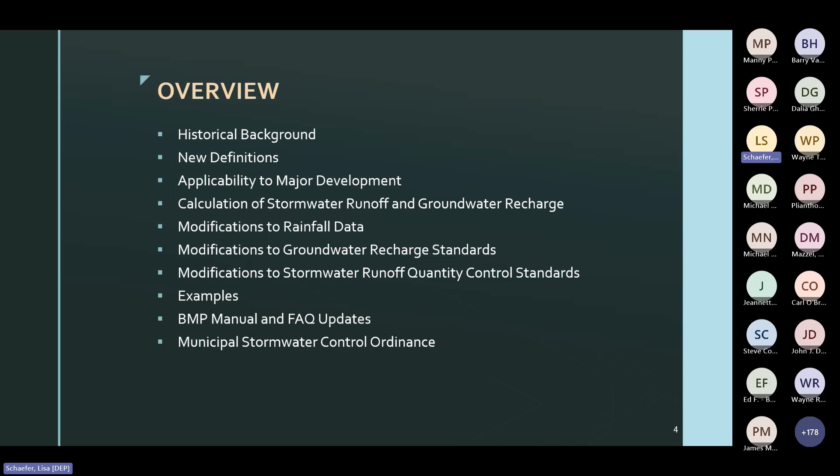So I hope you find the examples to be helpful. I'm also going to briefly review the other updates that were made to the BMP manual, plus those to the FAQs and the Municipal Stormwater Control Ordinance, or SCO, as I will abbreviate it going forward. All right, so lastly, before we wrap up, there will be a Q&A session.

Okay, so it's time for that brief history lesson on what led to the rule amendments and an overview of the studies involved. Executive Order 100 was signed by Governor Murphy on January 27th in the year 2020. This required that the DEP shall, within 2 years of the date of this order and consistent with applicable law, adopt Protecting Against Climate Threats, or PACT, regulations.

Furthermore, it required the DEP integrate climate change considerations, such as sea level rise, into its regulatory and permitting programs, including, but not limited to, land use permitting, water supply, stormwater and wastewater permitting and planning, air quality, and solid waste and site remediation permitting. Subsequently, Administrative Order 2020-01 was signed by then Commissioner McCabe to integrate climate change considerations and so forth into the DEP's regulatory and permitting programs.

In accordance with the executive order, the department conducted research and underwent several stakeholder meetings beginning in 2019, first as part of the PACT rules, and then again independently in October of 2022. The department released a New Jersey scientific report on climate change in 2020 and reports on rainfall studies in 2021. All of these were in preparation to address the impacts of climate change, which then led to the proposal on December 5th, 2022, and adoption on July 17th of this year of the Inland Flood Protection Rule.

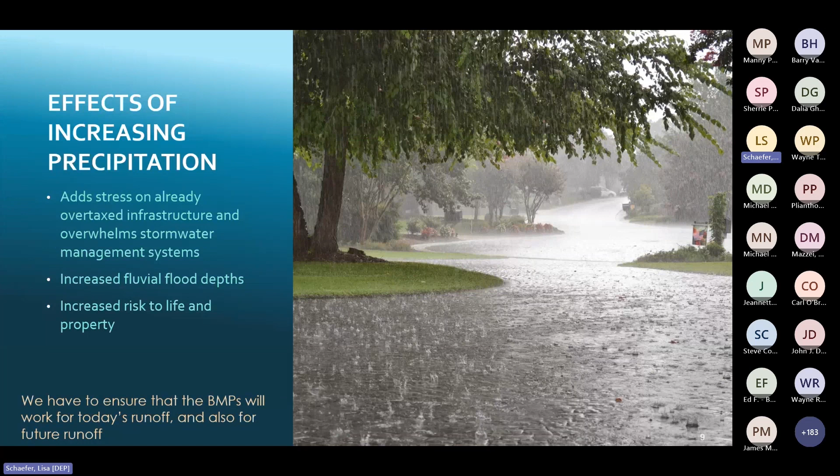So the adopted rule amendments are what is required to address these impacts. This information was shown just a few slides ago, and we're just going to move on to the changes made to the stormwater management rules.

So the rules are found at NJAC 7:8, and they were amended to address the role of climate change in BMP design. First, I'm going to provide a guide as to which subsections were amended. Let's start with Chapter 1 of the rules. I've underlined the subsections where the rules were amended, namely subsections 1.2 and 1.6. The details of those changes will be discussed momentarily.

Listed on this slide is the layout for subchapter 5 in the rules. Within this subchapter, the rule adoption amended only the underlined subsections, namely 5.4, 5.6, and 5.7. I will discuss those after I go over the changes made in subchapter 1.

So to provide some visual structure to the slides, all of the slides that follow for the stormwater management rules are going to have a dark teal green background. They're going to have a deep red box or tab on the upper right. I've further divided these so that the slides for subchapter 1 will have a light bluish green stripe on the left, while those specifically for the calculation sections of the rules will have a deep red stripe.

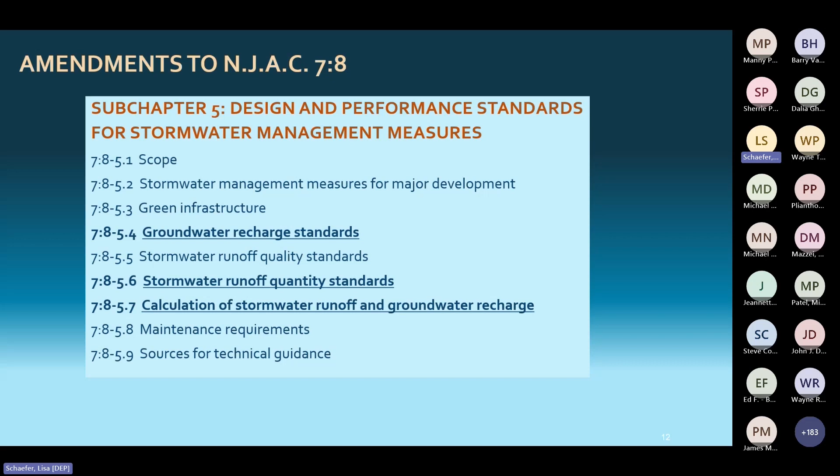Okay, so the amendment adds 2 definitions regarding public transportation projects that are subject to the rules in effect prior to this rule adoption, depending on when the public transportation projects achieve a certain status.

A public roadway or railroad means a pathway for use by motor vehicles or trains that is intended for public use and is constructed by or on behalf of a public transportation entity. A public roadway or railroad does not include a roadway or railroad constructed as part of a private development, regardless of whether the roadway or railroad is ultimately to be dedicated to and or maintained by a governmental entity.

And a public transportation entity means a federal, state, county, or municipal government, an independent state authority, or a statutorily authorized public-private partnership program pursuant to public laws of 2018 at the citation listed here that performs a public roadway or railroad project that includes new construction, expansion, reconstruction, or improvement of a public roadway or railroad.

Now note that a public transportation entity includes municipalities and counties that perform public roadway or railroad projects, but does not include the roadway within a private development, but dedicated to the municipalities or counties or to be maintained by the municipalities or counties.

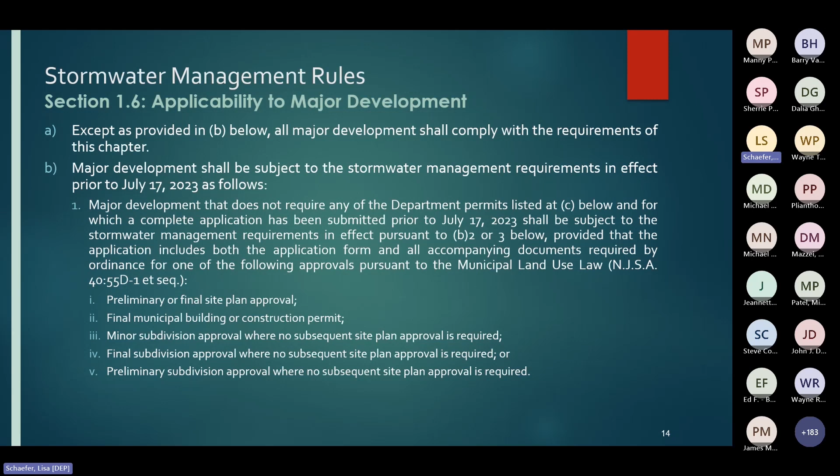Item 2 establishes the time frame for projects subject to the rules in effect on March 1st of 2021, again, providing it included all the required materials I just discussed. Similarly, the same goes for item 3, except the rules are those in effect on March 2nd of 2021, and projects are also subject to the same conditions regarding items submitted.

So now for item 4, which is for projects submitted to the department. If a major development project needs a flood hazard area, a freshwater wetlands, a coastal area facility review act, a waterfront development, or a highlands permit, and those permit approvals need a stormwater management review component, is technically complete and...

...has been submitted prior to July 17th, it is subject to either the rules in effect on March 1st of 2021 or the rules in effect from March 2nd, 2021 through July 16th, 2023, depending on when it was submitted, and provided everything required by the department's rules for those permits plus the application form are submitted prior to July 17th of 2023.

And take note that technically complete means that each item included in an application provides sufficient information for the department to declare the application complete for review, public comment, or public hearing.

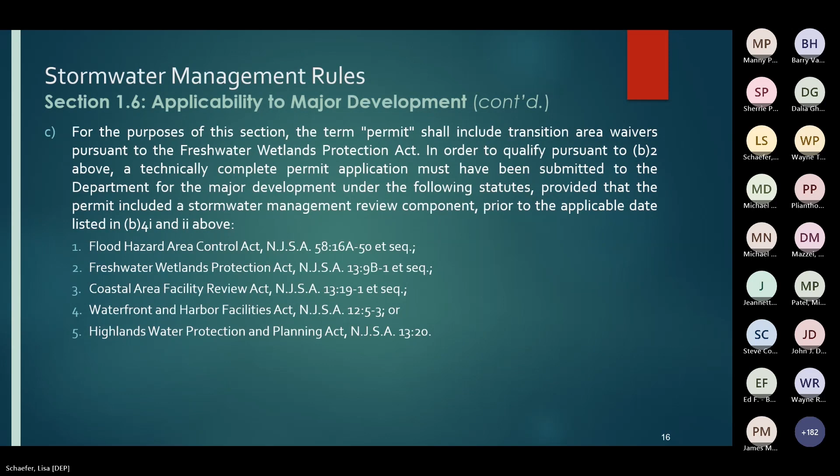Moving on, exemptions expire with the expiration, termination, or other loss of duration or effect of either one of the qualifying local approvals or department permits, whichever comes first.

The expiration of local approvals under B1 above shall be governed by local ordinance. And in the event there are multiple qualifying department permits under item C, the expiration date is governed by that permit, which expires last, provided that the permit is still in effect.

So once the exemption expires, the major development shall be subject to all requirements of this chapter upon reapplication for that permit and all subsequent permits or local approvals under the municipal land use law. And there's also one more citation for limits on those exemptions.

And this next bit is really important. The aforementioned exemption is limited to the land area and the scope of the project addressed by the qualifying applications or subsequent approvals. The review agency will consider the impacts from any revision, including but not limited to the items listed here, and may deem the exemption void if the revisions do not have a de minimis impact.

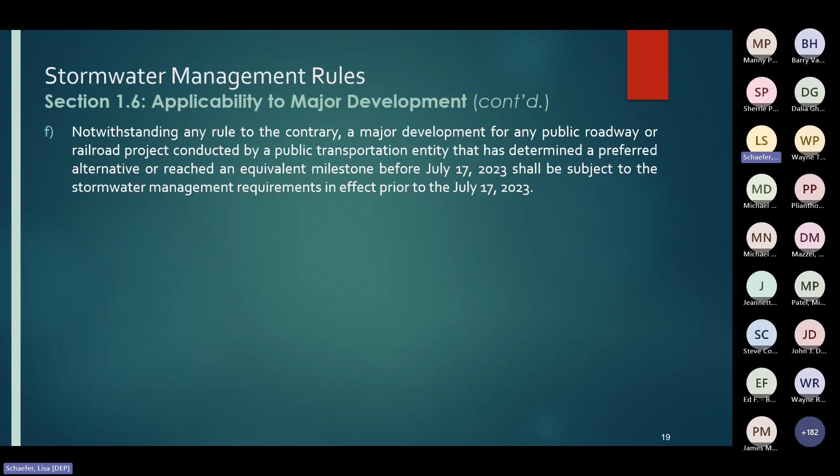Public transportation entities must demonstrate that the project has determined a preferred alternative or has reached an equivalent milestone prior to the rule adoption. The logic is that these projects have already undergone a significant level of planning and design such that revising the project now to meet the new rules would be a waste of public funds.

Next are 4 examples to help clarify the applicability portion of the rule adoption. To start things off, I have 2 examples for projects where a department permit is required.

For example 1, a non-residential major development submits an application for the department's Flood Hazard Area Control Act permit with a stormwater review component on August 1st of 2023 and is deemed technically complete. The non-residential major development also submits an application to the township for preliminary site plan approval on August 1st of 2023, but the township's SCO is still in alignment with the rules in effect prior to July 17th, that is, the prior rules.

So what rules or ordinance are applicable to this non-residential development? The answer is that the department will review the stormwater component of the application under the stormwater management rules adopted on July 17th, okay, the adopted rules. Therefore, the non-residential major development shall have in its design stormwater management measures in accordance with the adopted rules.

However, the township will review the stormwater management under its SCO pursuant to the prior rules. Now, since the design complying with the adopted rules is supposed to be more comprehensive and has a higher capacity than the design under the prior rules, the design under the adopted rules should be able to pass the stormwater control ordinance in effect pursuant to the prior rules.

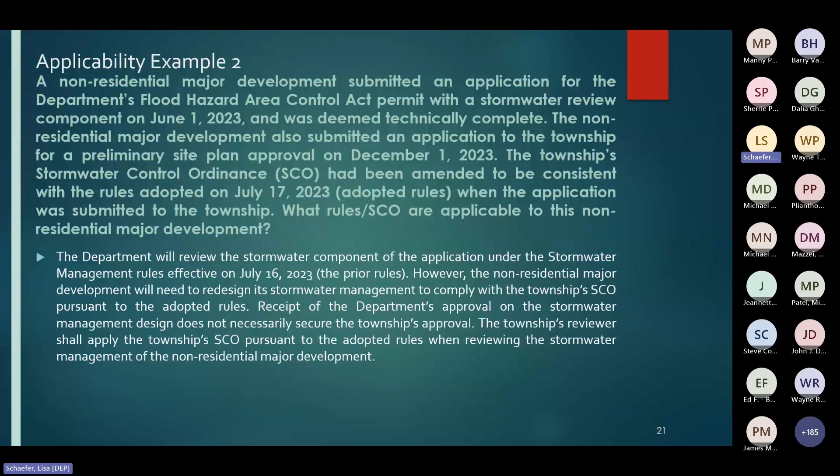Receipt of the department's approvals on the stormwater management design does not necessarily secure the township's approval. The township's reviewer shall apply the township's SCO pursuant to the adopted rules when reviewing the stormwater management of the non-residential major development.

Now I have 2 examples in which a permit from the department is not required. In this case, we have a non-residential major development submitting an application to the township for preliminary site plan approval on December 1st of this year, but the SCO is still in alignment with the rules in effect prior to July 17th. So they're operating under the prior rules. The project will not require a department permit as described in the list published in the rules at subsection 1.6c.

So the question is, is the project subject to the amended stormwater management rules? The township will review the stormwater management under its SCO pursuant to the prior rules, provided the submittal includes all of the required documents prior to the township amending its SCO pursuant to the July 17th, 2023 amendments to the stormwater management rules. Pursuant to the requirements of the MS4 permit, the township must review its SCO to align with the amended rules and have it be in effect within 1 year of the rule adoption.

For our last example, another non-residential major development submitted an application to the township for preliminary site plan approval on December 1st. By this time, the SCO had been amended to be consistent with the rules adopted on July 17th, when the application was submitted. Again, no permit is required from the department. So is the project subject to the amended stormwater management rules?

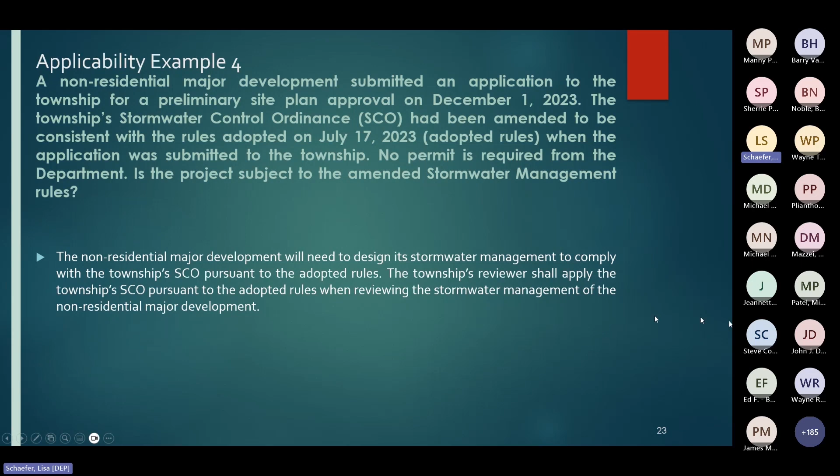Moving forward, the slides with this red stripe on the left all pertain to Subchapter 5 in the Stormwater Management Rules. There are no changes to subsections 5.1 Scope, 5.2 Stormwater Measures for Major Development, 5.3 Green Infrastructure Standards, 5.5 Water Quality, 5.8 Maintenance, or 5.9 Technical Sources.

I'm going to handle the remainder of the subchapters out of order, starting with 5.7, Computational Methods, as this impacts the remaining subsections I'm going to cover.

There is a change in the allowable computation methods, namely only the NRCS methodology is found in the adopted rules. So take note that the NRCS methodology must be used when calculating the water quality design storm.

Throughout the remainder of this presentation, I'm going to do my best to give you the page citations from the BMP manual. This information is included under item 13 on page 32 of Chapter 5 in the BMP manual.

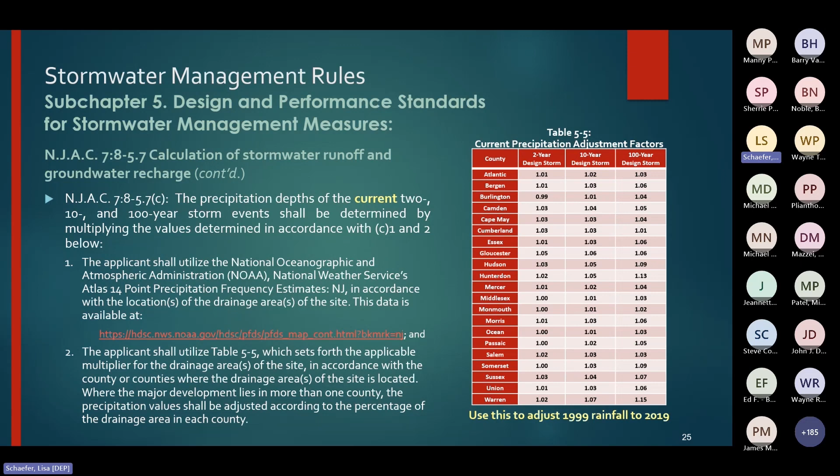As an alternative, you can use the county 24-hour rainfall data from the NRCS and apply the current precipitation adjustment factors from Table 5-5 in the rules for your county. The county-specific 24-hour rainfall data published by the NRCS in the 2012 Engineering Field Handbook is reprinted as Table 5-1 on page 15 of Chapter 5 of the BMP manual.

Now, there's a second multiplier required in the rule amendments. Applying the future precipitation change factors to the published NOAA rainfall data will allow us to look ahead to the period from the year 2050 through 2099 to address the future impacts of climate change.

So of course, for a site in more than one county, it's the same method from the bottom of the previous slide, but you're going to use the future projected change factors. That means you multiply the rainfall depth from the first area by the county-specific future precipitation change factor for the design storm that's specified, and then multiply that product by the percentage of the total area lying in the first county. You do this then for the second area using the future precipitation change factor for the second county for the same year design storm, and you sum them up to get the future projected total rainfall depth for that design storm.

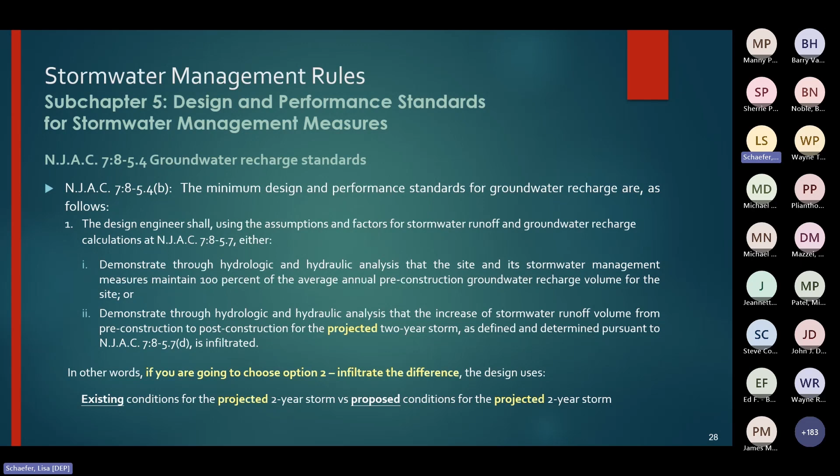Similarly, there's rule text for the second option to demonstrate compliance with the stormwater runoff quantity standards. As on the previous slide, the bold or yellow text is the portion of the rule that's been amended in the rule adoption.

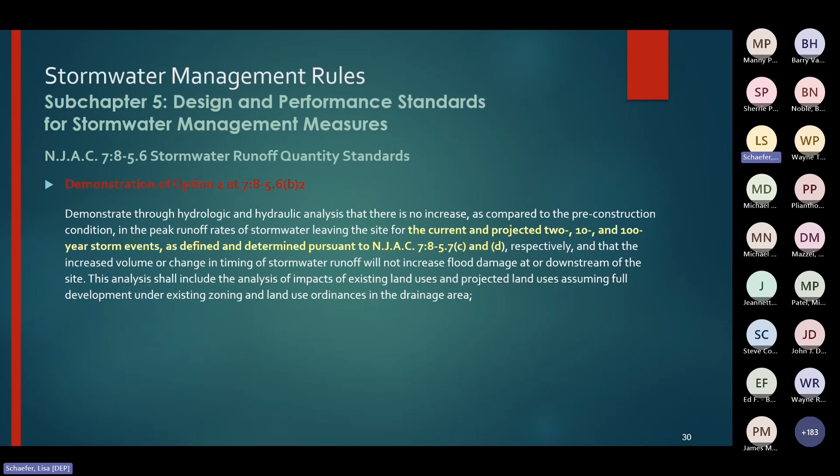So regardless of which option is selected, the quantity control calculations required will have to include an analysis of the runoff volumes produced for both the current and projected design storms. You're going to review the pre-construction, aka existing conditions, and what's proposed using the rainfall data to which the current precipitation adjustment factors are applied, to do your comparison using the numbers that reflect what is precipitating in 2019.

You also have to review the pre-construction or existing conditions and what is proposed using the rainfall data to which the future precipitation change factors are applied, to do your comparison using numbers that reflect what will be happening from 2050 to 2099. That way, your review checks the design's work for what's currently precipitating and what we can expect will precipitate due to climate change.

If you recall, I covered the time of concentration calculations on slide 27, but they also come into play here. And I will say that if you are using modeling software to design or review the accuracy of designs, I think you'll find it easier to create a separate model for projected storms, separate from that for the current storms, because of the different rainfall depths.

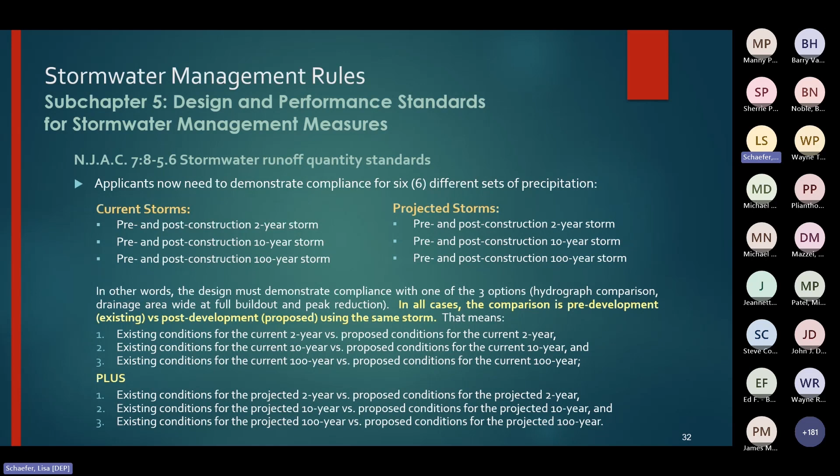You may also want to look at page 84, chapter 5 of the BMP manual, which has an updated summary of modeling guidance. I do have 5 examples for you today, but I see I'm running a little late, so bear with me.

The first is applying the current precipitation adjustment factors to a site located in just one county. The second example will be for a site partly in one county and partly in another. The third is a comparison of hydrographs from the pre and post development conditions for the projected and current storms when the impervious cover is reduced by the proposed design.

The fourth example will show how a design using a small-scale BMP will meet the groundwater recharge requirement. And the fifth example is sizing an MTD using the NRCS methodology.

So for the first example, we're going to apply the current precipitation adjustment factors to the rainfall data for a site located at Trenton Station 2 on the NOAA NWS PFDS website.

So we go to the website found at the URL, and in the data description section from the drop-down menu, you're going to make sure that it says precipitation depth rather than precipitation intensity, as shown on the left. Similarly, for the time series, you're going to ensure that partial duration has been selected from that drop-down menu.

And in step B, under the select location option, you're going to either manually enter the location using one of the options shown on the screen, or use the map to locate the site and then zoom in. Of course, here we're looking for Trenton Station 2.

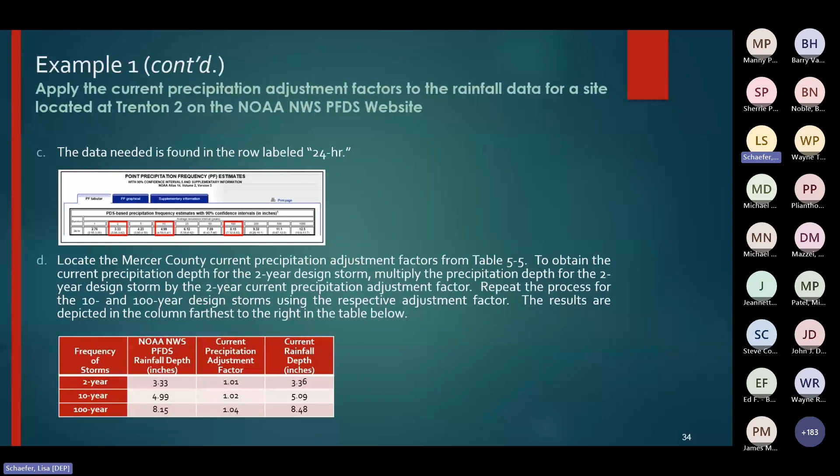For the next example, we've got a site situated in 2 counties, and the method is to obtain the current adjusted rainfall depths for each of the 2 counties and then weight average them based on the area of the site in the respective county.

The site is located on a county line shared by Middlesex and Mercer counties. One-third of the site is in Middlesex, and the remaining two-thirds is in Mercer County.

In step A, we obtain the NOAA data and the current precipitation adjustment factors and calculate the rainfall depths for each of the design storms for each of the counties.

Example 3 provides a scenario showing non-compliance with the requirements when the proposed development reduces the regulated motor vehicle impervious surface and increases the slope of this surface.

Often for redevelopment projects, a designer may choose the option at 7:8-5.4(a)3.i to demonstrate compliance for quantity control — that for stormwater leaving the site, post-construction runoff hydrographs for the current and projected 2, 10, and 100-year storm events, as defined and determined pursuant to 5.7C and D respectively, do not exceed at any point in time the pre-construction runoff hydrographs for the same storm events.

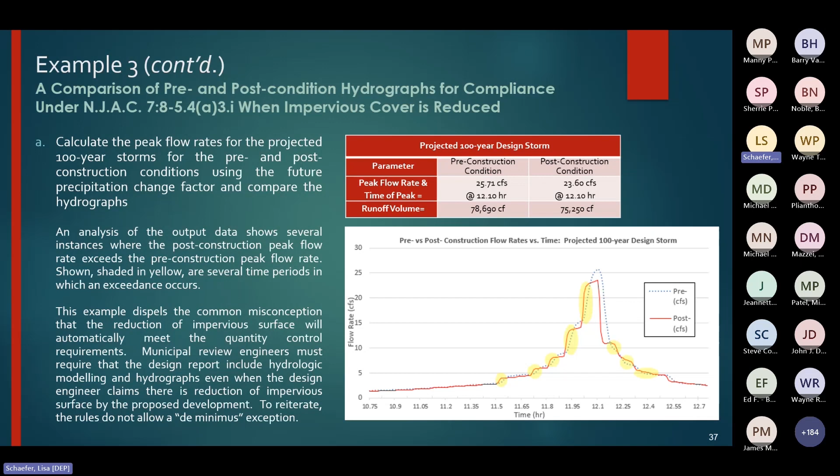Example 4. This example provides a scenario showing the groundwater recharge calculations.

A 2.5-acre wooded lot is located in Somerset County. The lat and long of the site are 40.4573 and negative 74.5309 degrees respectively. The proposed development consists of a 1-acre office building, a half-acre parking lot, and a half-acre lawn area, plus half an acre of existing woods that will remain undisturbed. We're going to design a stormwater management system to meet the rules, and the soils present on site are HSG B.

We'll assume a small-scale infiltration basin is to be designed to meet the design and performance standards for demonstration of groundwater recharge requirements by infiltrating the increase in stormwater runoff from the pre- to post-construction condition for the projected 2-year storm. And we're going to calculate the volume of runoff to be recharged.

I'm going to skip parts of the design calculation because I want to focus on the groundwater recharge requirement. For this site, I've included the NOAA rainfall depth, the future precipitation change factor for Somerset County, and the depth of precipitation for the projected 2-year design storm.

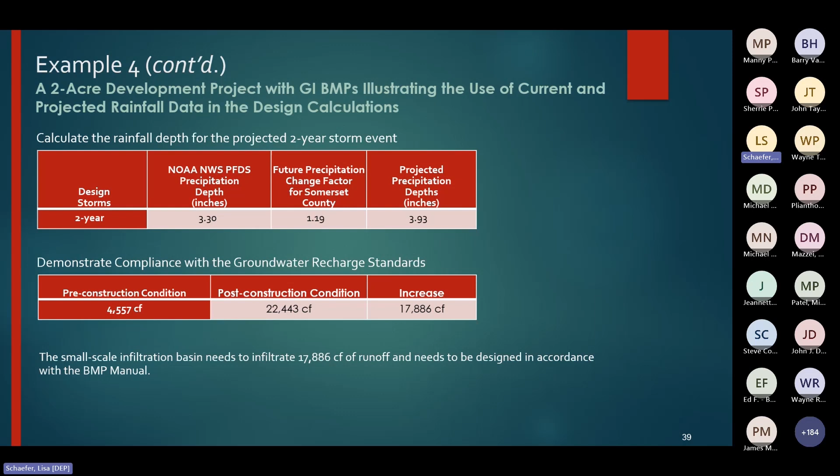Okay, we're going to move on to example 5, sizing an MTD using the NRCS methodology. If you recall, the rule amendments discontinue the use of the rational method and modified rational method for stormwater calculations, so now we will walk you through what is required.

We're going to calculate the peak flow rate for sizing an MTD, treating the water quality design storm from a quarter-acre impervious motor vehicle surface.

So we have these parameters, and when using the NRCS methodology, you need to calculate the time of concentration, for which we follow the method covered in example 5-1 of chapter 5 in the BMP manual. That example begins on page 33 of the manual, and it's also the formula found on slide 27.

As stated earlier, we use P2 for the projected 2-year storm in the T sub C calculation for the water quality design storm, but there won't be that much difference here if we mistakenly use that for the current 2-year design storm, given that our drainage area is only a quarter acre.

Then we calculate the maximum sheet flow length using the formula for the McCuen-Spiess limitation, found on page 24 of chapter 5 in the BMP manual, and we calculate that to be 909 feet. However, the maximum sheet flow length should not exceed the McCuen-Spiess limitation or 100 feet, whichever is shorter, so we're going to use 100 feet.

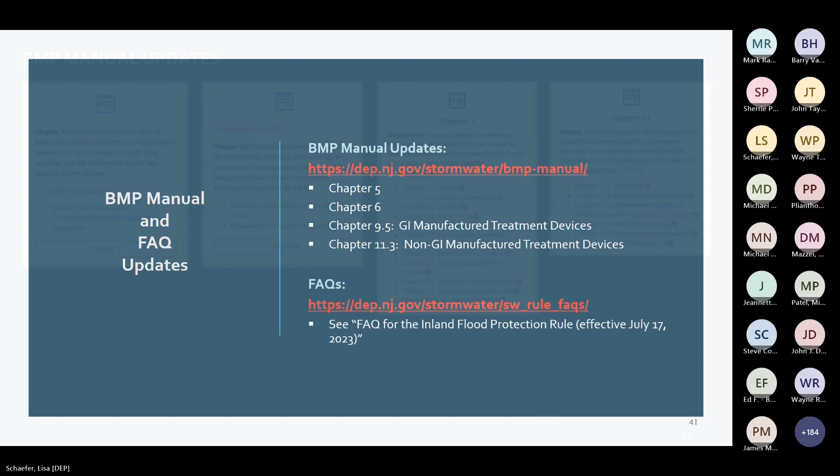These are screenshots from the updated BMP manual webpage. Everything was updated to match the rule adoption wherever it's marked here in red.

Okay, so moving on. The FAQs have been expanded to address various issues, some of which may have been mentioned in earlier slides. Go all the way down to the bottom of the webpage above the blue footer, and look for the rule adoption date. If you click on a question, it will expand to show the answer.

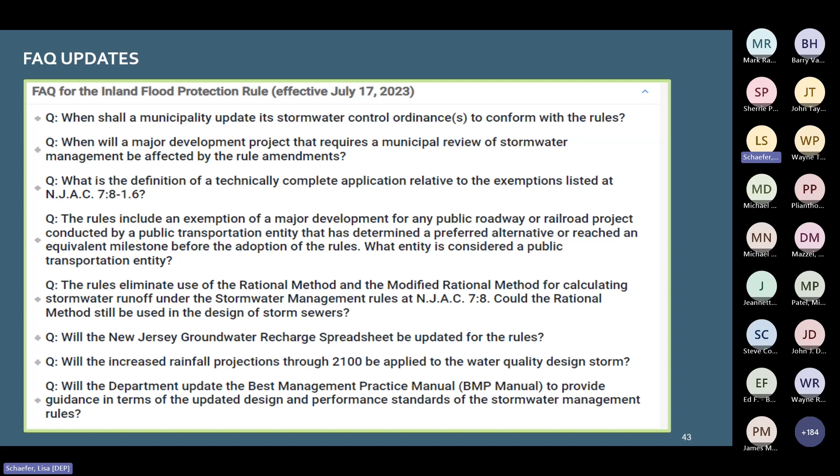Lastly, we also have a simplified version. This one simply cites subchapter and section numbers from the stormwater management rules instead of listing the full text, to reduce or eliminate the need for a municipality to revise its ordinance when the stormwater management rules are amended. A municipality has to comply with the applicable laws and procedures for the passage and adoption of ordinances pursuant to this simplified version.

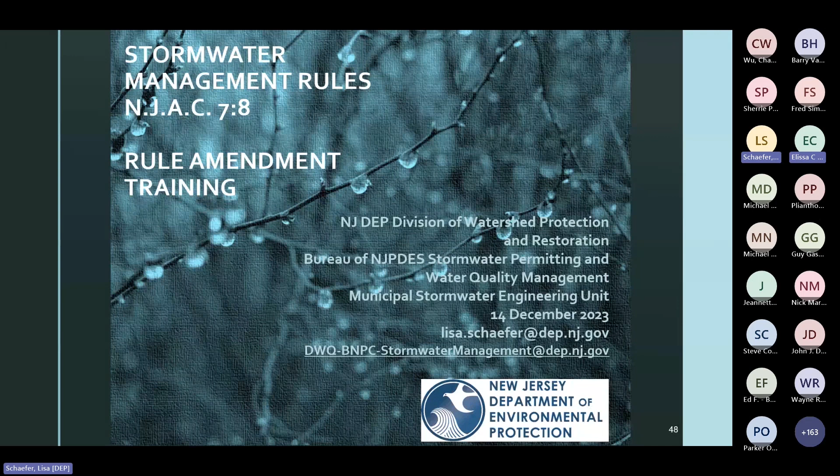Okay, so we're going to continue on with SWMDR in just a moment. Up next will be Anthony or Manesh with the GI fact sheet and example 1. Please stand by for my coworker to take over control. Yeah, it's me, Lisa. Hey, I thought so. Thanks. All right, thank you.

All right, let me just pull up these slides.

Okay, good afternoon, everyone. So we'll move along with the rest of SWMDR Module 4 here. Let's get started with this presentation.

The earlier modules introduced green infrastructure and some of the regulatory requirements around it. Today we'll start with a review of the GI fact sheet, which you can find on our website. This is in an effort to help better understand the rule requirements and how designs should meet them, and what to check for in your reviews. Then we'll go over an example that incorporated GI into the design, and we can evaluate whether it follows what's spelled out in the GI fact sheet.

So let's begin with going over the green infrastructure fact sheet. This part of the presentation will answer the questions shown on the slide here. To get right to the first question, we covered in Module 1 what we mean by green infrastructure, which we abbreviate as GI. Dr. McGee also spoke about GI MTDs in Module 2, and we also included GI in Module 3.

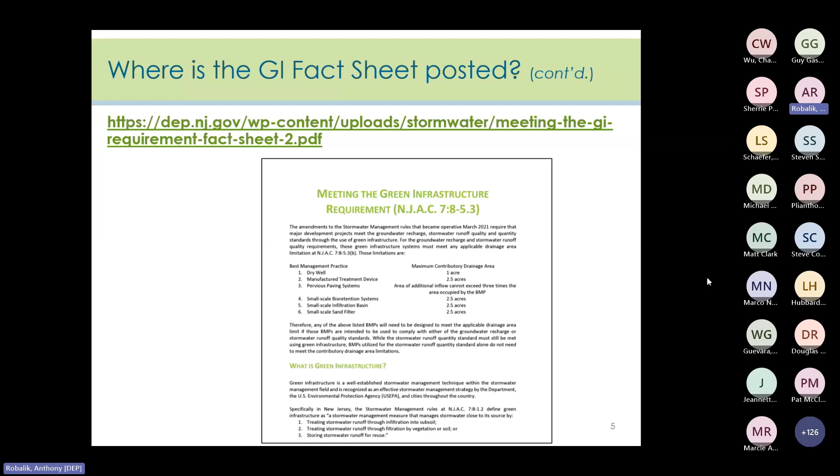The fact sheet is an 8-page document that presents and provides some context to the information in 7:8, the stormwater management rules, which will be referred to throughout the rest of this presentation just as the rules. This is a screenshot of a portion of page 1 of the fact sheet, and next we'll take a look at what is actually in the fact sheet.

But first, let's see what the rules say about green infrastructure. So here is 7:8-5.2a in the rules. This is where you'll find that the design and performance standards for groundwater recharge, water quality, and quantity control must be met using green infrastructure.

Under item F in this subchapter, which isn't shown on the screen here, is where you'll find Tables 1, 2, and 3, which list BMPs and whether or not they are considered GI. BMPs listed under Table 1 are identified as GI. Table 2 contains some large-scale GI, and Table 3 are non-GI BMPs.

But this is just a review of what was covered back in Module 1 in the overview presentation. The tables also have important notes and footnotes that should not be overlooked, and if you need assistance understanding them, you can contact us.

So the takeaway from this is that the rules require a project to meet the design and performance standards using GI, and that means usually Table 1 BMPs will be used as they satisfy all of the requirements. Table 2 BMPs, as covered earlier, can be used to address stormwater runoff quantity control. When used for the other design and performance standards, Table 2 BMPs will require a waiver or variance to be used. And Table 3 BMPs are not considered GI, and therefore will always require a waiver or variance to meet any of the design and performance standards.

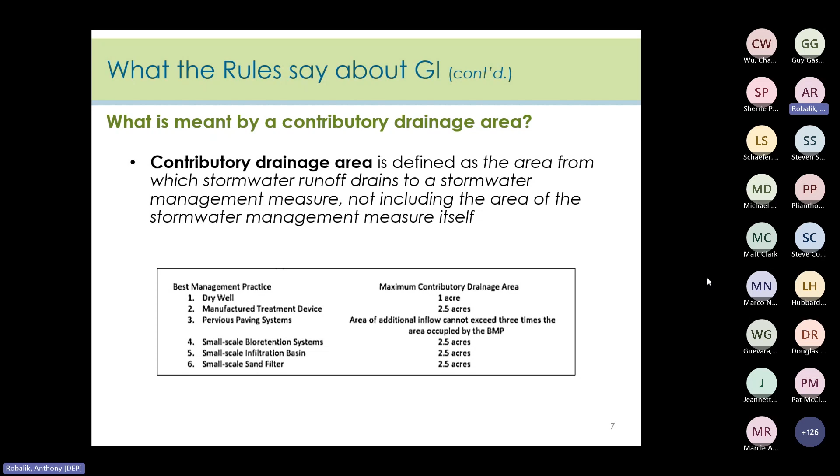So next is how to implement GI into a project or make sure that it is properly implemented. The fact sheet includes a metric to help anyone evaluate if GI has been properly implemented.

The first one: GI manages stormwater close to its source. Let's clarify what we mean by that. GI mimics the natural hydrologic cycle, although stormwater traveling from this point here on the right has a lot farther to go than a drop falling here to get to the basin over on the left side of the site.

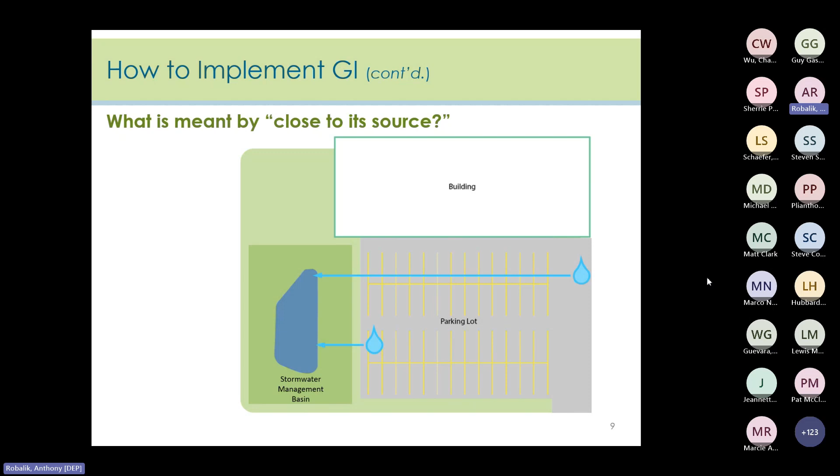Remember that clearing, grading, and paving results in much shorter values calculated for runoff travel times because pavement is much smoother than natural terrain. Plus, we typically use uniform and flatter slopes for parking lots. So in conclusion, the basin is not close enough to the runoff generated by the far right of the proposed parking lot shown in this image, and there's little opportunity for stormwater to interact with vegetation or soil with this particular layout. So this layout is not considered as meeting the GI requirement.

So this is an example of placing BMPs close to the source of runoff. Here's the project description. A fully impervious 3-acre site in an urban redevelopment area is proposed to be redeveloped. The redevelopment will consist of a 1-acre building plus 40,000 square feet of parking area and internal driveways, and also a 1-acre overflow parking area.

A green roof and an underground cistern are proposed to manage the rooftop runoff from the 1-acre building. Stormwater islands designed to infiltrate into the subsoil are proposed to manage runoff from some of the parking areas and internal driveways. And a permeable asphalt system designed to infiltrate into the subsoil is proposed to manage runoff from the overflow parking area. So the proposed redevelopment is a major development since it will disturb 1 or more acres of land and is therefore subject to the design and performance standards and the rules.

However, because it is in an urban redevelopment area and it was previously fully impervious, groundwater recharge is not needed. Additionally, the proposed condition reduces the impervious surface present on site in the existing condition, so there is no recharge deficit.

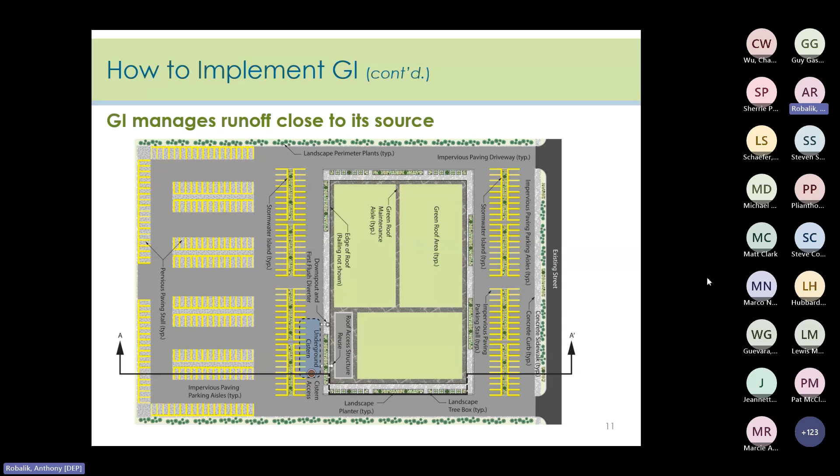So this is the plan view of the site from the previous slide. Since the existing site is so highly impervious, many of the non-structural stormwater management strategies required by the local municipal stormwater management plan could not easily be implemented on the site. However, due to the proposed GI practices, the project breaks up or disconnects the flow of runoff over impervious surfaces and provides low maintenance landscaping that encourages retention and planting of native vegetation and minimizes the use of lawns, fertilizers, and pesticides. So in this example, all of the stormwater runoff generated by the redevelopment is managed close to its source. And so we can answer with a yes to that first question on the GI fact sheet.

So the next question to be asked is if the GI BMPs are dispersed throughout the site. The previous site was certainly a good example of spreading BMPs throughout the site, and this is another one. The parking stalls shown here are actually pervious pavement, and they are separated by traditional impervious pavement aisles graded to direct runoff to the pervious areas. Roof runoff also drains to the subsurface storage beds below the pervious pavement parking stalls at either end without exceeding the drainage area limits. So we can also answer a yes for this site.

Now for the third site, the requirement to distribute GI throughout the site does not mean that multiple GI BMPs can't be near each other. It's important they be close to the source of runoff, like these dry wells are to the building for which they manage runoff, and they are distributed because they are on 3 sides of the building.

So if this is part of a larger site where there are additional GI BMPs, this layout is fine, and a separate discharge for each of the 7 dry wells is not necessary, as long as no more than 1 acre of runoff is directed to any individual dry well, which is the drainage area limitation for dry wells. And to be GI, they must each function individually for the water quality and recharge storm events. So if those conditions are met, then we can also answer yes to this third site.

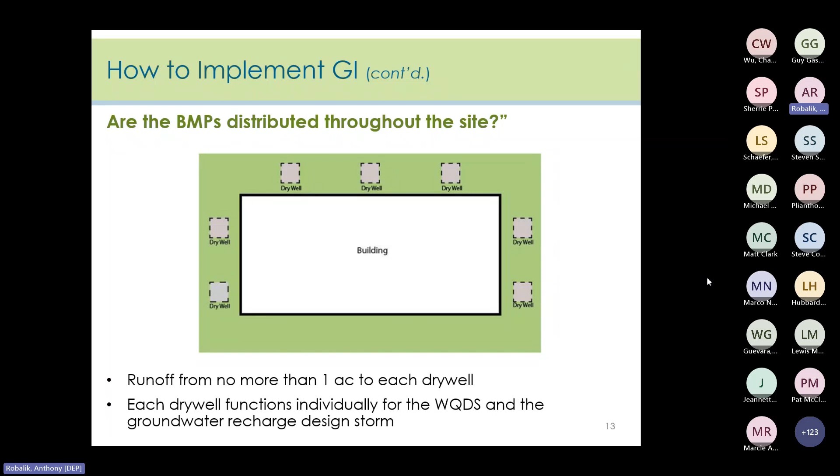So the last question to be asked is whether the contributory drainage area of the proposed GI BMP is less than or equal to the limitation found in the rules at subsection 5.3. And it's also restated on the cover page of the GI fact sheet.

So small scale bioretention basins are ideal for use in parking lot islands, and where grass strips at the edges of parking areas or roadways are typically used in the past. The drainage area limit for a small scale bioretention basin is 2.5 acres, which generally is more than enough.

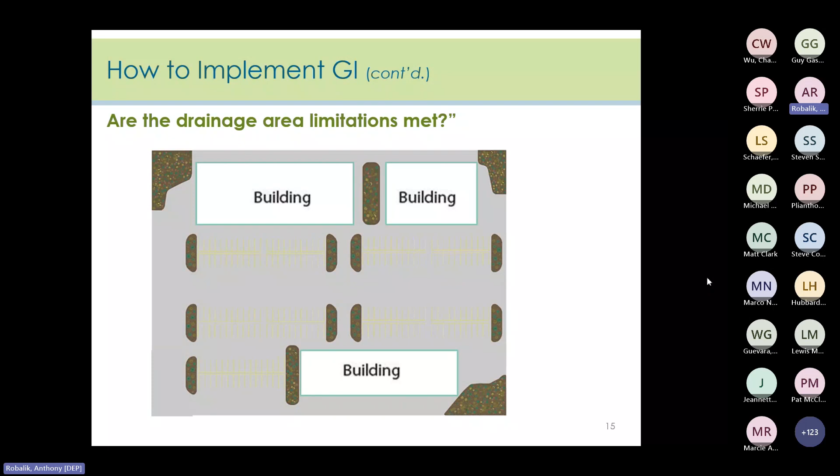Okay, so with that, that concludes the GI fact sheet portion of the presentation. Next, we'll be reviewing a plan review example that focuses on using green infrastructure.

All reviews require figuring out which standards apply and then checking them for compliance. The questions we must ask and answer are: what is the disturbance on site? Does it trigger major development? And will the project be required to do water quantity, groundwater recharge, water quality, and groundwater mounding? We need to figure all that out and see if and what applies, and how they will be addressing those requirements using green infrastructure.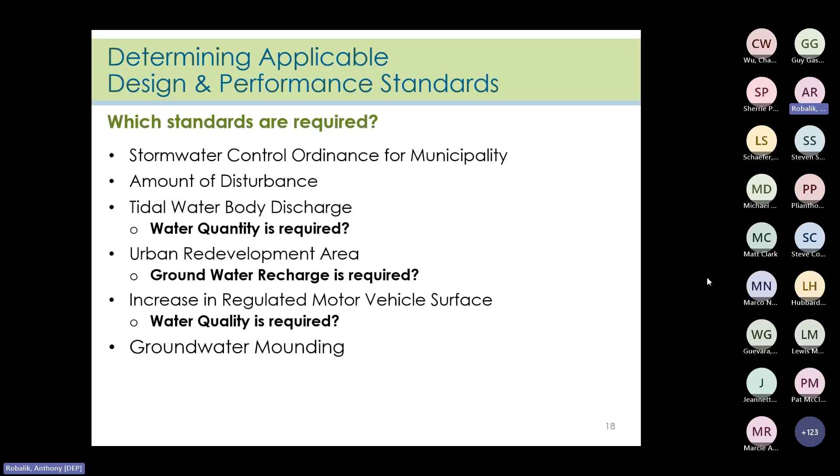It's important to know what the site looks like, what the pre-construction conditions are, and what the existing land cover is. Plus, we need to identify any soil testing information. So let's take a look at what's going on in this particular example.

The property in question is a farm that has been a farm for a number of decades, and it comprises over 18 acres of land. The road running east to west at the front of the property is a county route with sizable traffic volumes, and the property is adjacent to some forested properties along the back lot line, which is also a stream corridor. The property drains towards the stream, which flows to the south before crossing under a roadway east of the property via a culvert.

Here's the topographic view with the wetlands delineation and the 150 foot wetlands riparian buffers, shown as the dashed lines.

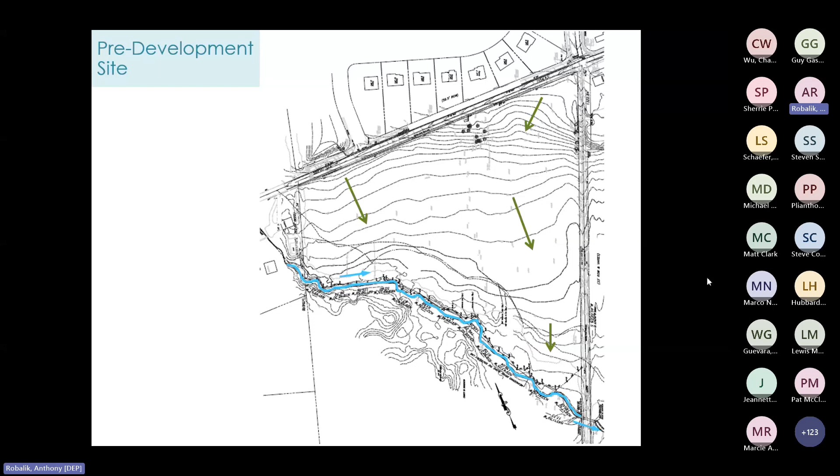The proposed development includes the clearing and grading of the property, construction of 25 single-family homes, widening of the existing road found on the right side of the plan, and another internal road. Both roadways will be constructed with 6-inch curbs and will each end in a cul-de-sac. The stormwater management report indicated 4.7 acres of impervious cover is proposed, without a breakdown into motor vehicle surface versus rooftop surface, and that breakdown is important with respect to the current rule.

We can start by checking the coverages. The homes are about 0.35 acres each on average, which totals to 8.75 acres for the 25 homes. The proposed roadways are 28 feet in width, ending in a 50-foot radius cul-de-sac, and that ends up being roughly 70,000 square feet or 1.6 acres of new motor vehicle surface proposed.

Additionally, the existing portion of the roadway along the east side of the property will be newly collected where no collection system existed before, so it also counts towards the net increase in motor vehicle surface. I think we could safely say that these totals exceed the threshold for major development. So this is definitely a major development.

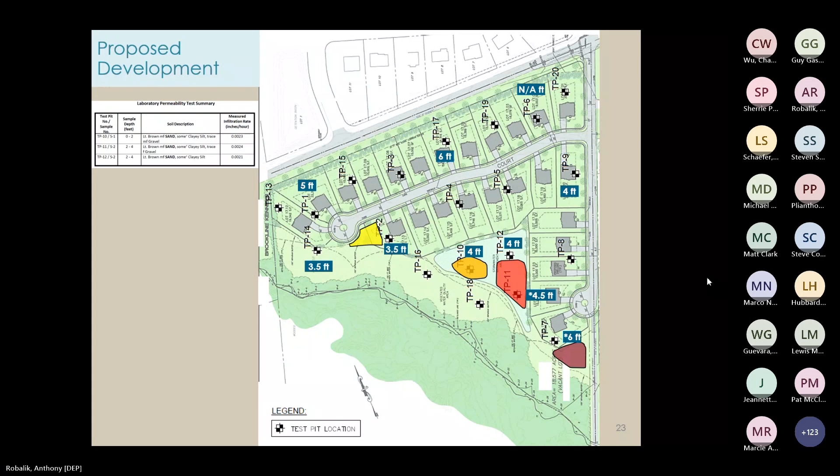So now let's look at the drainage area map proposed for the site. The different color areas represent the different drainage areas, showing which areas are contributory to which BMP. Each of the BMPs are underdrained small-scale bioretention basins, and each contributory drainage area is less than the allowed maximum of 2.5 acres.

So that appears to meet one of the requirements for green infrastructure, which was that third question we asked earlier in the presentation.

However, if we look at the layout of the basins, the placement of some of them are too far from the source of runoff, mainly the basins toward the bottom right of the slide. Basin number 2, shown here in orange, is not close to the source of runoff, which is a requirement for green infrastructure. Its contributory drainage area is not near the center of the property where the basin is located.

Basin number 3, shown in red, is located too close to basin number 2. They're only separated by a berm, and despite being located in the southern half of the property, it's collecting runoff from all the way in the northeast corner of the site.

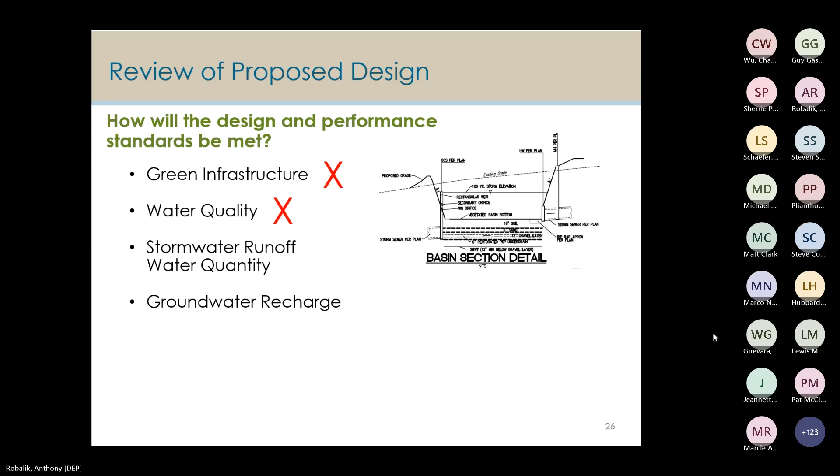Next point: the stormwater calculations prepared in 2022 used the Type 3 distribution for the 2, 10, and 100-year design storms. As per the 2021 publication of Chapter 5, the NOAA C or D distribution should have been used instead. So that will also go into the review letter, and new calculations would be required. This site would not meet the runoff quantity control standard.

For groundwater recharge, the report states the project demonstrates compliance with subsection 5.4 of the rules because all of the runoff is collected and infiltrated. That statement is false with respect to the current design. It may have been true for an earlier iteration of the design, but as we saw, they're proposing under-drain bioretention basins.

Which of course will not provide any groundwater recharge. In line with this idea that the proposed BMPs are providing recharge, the narrative of the stormwater report states that the proposed 2-year hydrograph volume is less than the existing 2-year volume, shown from this excerpt here. However, this narrative is incorrect and actually contradicts the report calculations, which show an increase in the volume of runoff by the proposed site. So the project will have to be revised along with the narrative, and no further detail was provided in the report on meeting the groundwater recharge requirement.

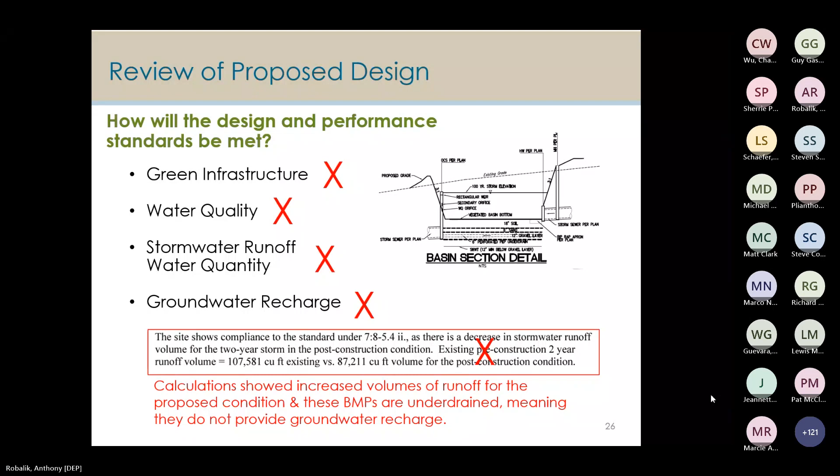Now, whether these alternatives are practicable to implement, of course, really depends on the circumstances present at a particular site. There's no one-size-fits-all solution to meeting the green infrastructure standard, and every site will ultimately require its own analysis. But with that, let's move on to the first of these 4 slides.

So here's a site again, and just briefly, one possible GI BMP to consider would be a bioretention swale. That is, if the site provides the required separation from the seasonal high water table and high enough infiltration rates. Bioretention swales can be located along the perimeter of spaces such as parking lots and roadways.

So another GI BMP to consider would be a pervious paving system. A pervious paving system is an option that can be implemented in parking areas or other applications where traditional pavement would have been used. And this decision, of course, must consider other restrictions, such as whether or not an area is considered a right-of-way or the possibility of subsurface utilities.

Another option would be to maintain the use of small-scale bioretention basins, but alter the site grading to allow for the basins to be better distributed throughout the site, and we already mentioned that.

And then finally, another alternative would be a multi-approach alternative where multiple GI BMPs are incorporated into a site to treat stormwater runoff, such as bioswales, rain gardens, tree pits, and dry wells. But again, the approach to incorporating multiple GI BMP types is specific to every site, and it requires an in-depth analysis for each particular site.

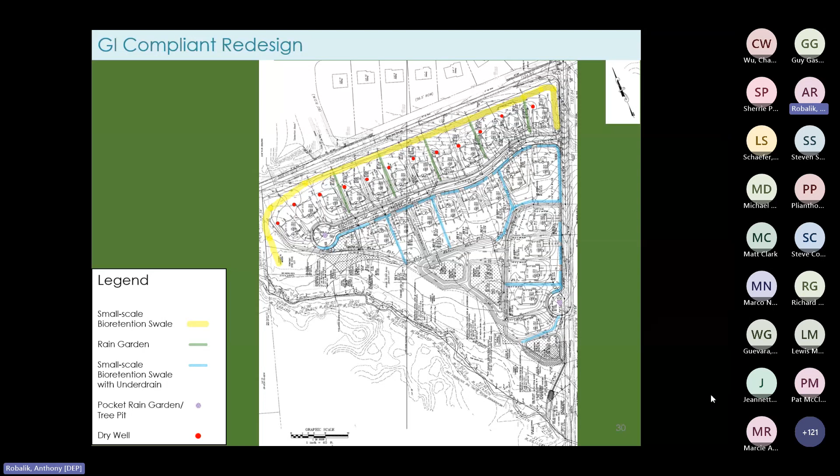Okay, so in summary, this presentation covered what is meant by green infrastructure, or GI, which is, just to go over it again, a stormwater management measure that manages stormwater close to its source by either treating stormwater runoff through infiltration into subsoil, treating stormwater runoff through filtration by vegetation or soil, or storing stormwater runoff for reuse.

The fact sheet was created to help the public better understand GI and how to implement it, along with examples of situations not considered meeting the definition of green infrastructure. To address water quality, groundwater recharge, and runoff quantity control, the rules require GI to be correctly used. And answering the 3 GI questions shown here when you review a design will assist in determining if GI is properly implemented on a site, meaning the GI BMPs are located close to the source of runoff, they are distributed throughout the site, and that the drainage area limitations are met.

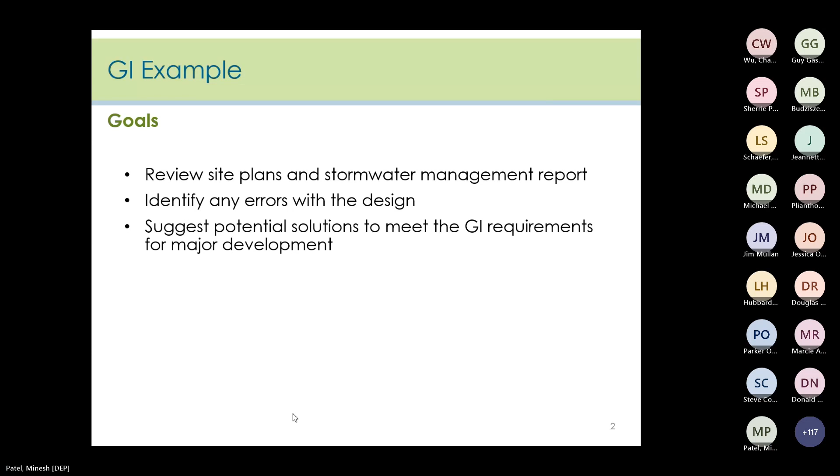So let's take a look at what's going on in our example. We'll start with what the site looks like, what the pre-construction conditions are, and what is the existing land cover. The property in question is a site covering roughly 11.7 acres that is primarily undeveloped and wooded. It contains the abandoned ruins of a single-family residence and related outbuildings on the northwest portion of the site. The site runs alongside a state highway. To the west of the property is a conservation easement containing a ponded area draining to a tributary of a local river. The site itself receives stormwater runoff draining from the east side of the divided highway, and there are some mapped wetland areas on the site as well.

So let's take a look at the drainage area map for the existing condition. Here's a topographic view. As you can see, the arrows here depict how the site would flow. Some flow comes from the road to the northwest and some from the highway to the east. Everything flows towards the southwest portion of the site, with the high point of the site being in the northern area.

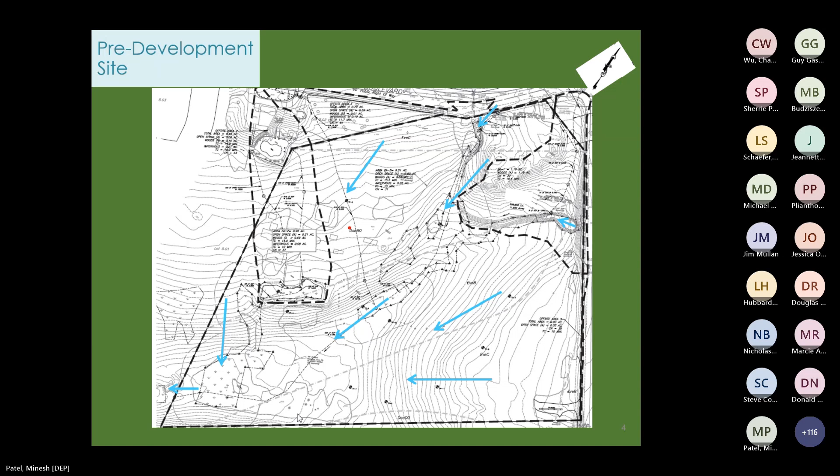The proposed development includes the clearing and grading of this property. There will be construction of 152 age-restricted affordable housing units in a single multi-story building, a single access driveway, surface level parking, and multiple stormwater basins that will discharge to the southwest corner of the property to support the existing drainage patterns. The project will be constructed in two phases. The first will include 84 units, and the second, 68 units, which are located on the left side of the building as shown.

From the stormwater management report, the narrative states there are 3 small-scale infiltration basins along the southern border that are designed to provide extended detention of the larger design storms, plus a northeast detention basin for the off-site runoff entering the site to the north and east.

So immediately, there's a big issue with this design. All 3 of the basins proposed to meet the GI requirement are grouped at the southern side of the project. So clustering these BMPs together is not compliant with the GI requirements. Just remember, the BMPs have to be distributed throughout the site and manage stormwater close to its source. The proposed design is going to rely upon infiltration of runoff to meet the groundwater recharge requirement and water quality.

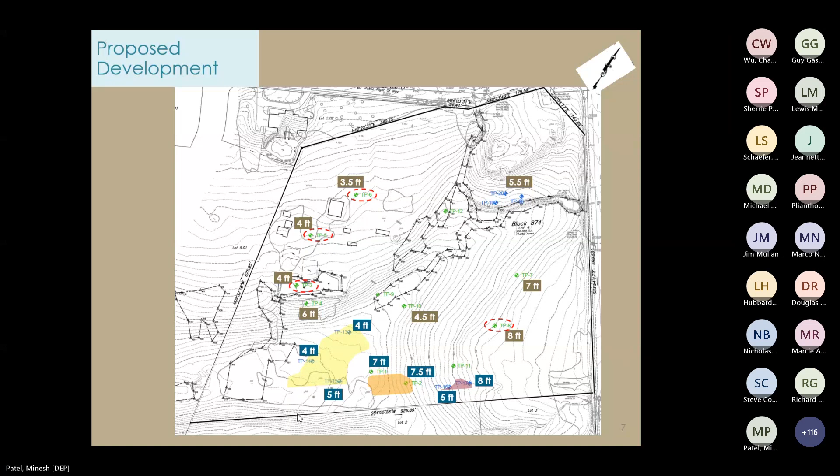The report shows quite a variation in the test results for permeability. So let's look at the table of the testing results. Here's that table, and I've circled the locations where the field-tested permeabilities were less than 1 inch per hour. So unless soil replacement is proposed, these locations are not really suitable for infiltration BMPs. Given the low permeabilities at the encircled test pits, we'll have a problem with the ability of the orange and yellow shaded basins to drain properly, and we'll add this onto our review letter.

So next, let's look at information found in the stormwater report, which states that 3 basins are designed as small-scale infiltration basins, but we do have to check if they really are.

So this is the node diagram from the stormwater management report. These are usually upfront in the materials submitted, and I use them to look at how the site is modeled and make any kind of notations as I start my review.

Basins 27P, 24P, and 38P are the basins numbered 1 through 3. They have superimposed the inflow areas taken from the basin summary reports, with the totals appearing in the brown shaded boxes. The node report shows Basin 1 draining to Basin 2, and that drains to Basin 3, such that the contributory drainage area appears to exceed the 2.5 acre limitation established in the rules and in the GI fact sheet. The connections between BMPs is something that has to be checked to determine if this is true.

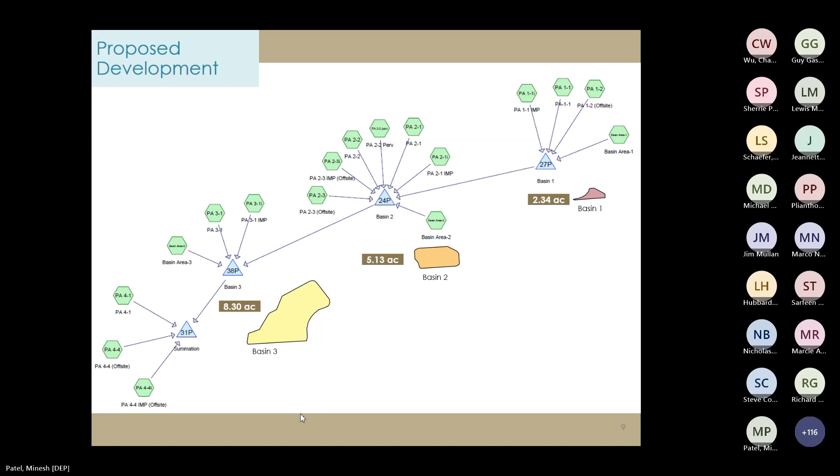Here's the drainage area map for the post-construction condition. This shows the contributory drainage to each small-scale infiltration basin is less than the allowed maximum of 2.5 acres, which appears to demonstrate compliance with subsection 5.3. But we have to dig further to evaluate how individually versus connected the basins performed when it comes to the water quality, the 2, the 10, and the 100-year design storms.

Before we dive into the construction details, I just want to say that I'm not including further review information for quantity control and groundwater recharge. For the required groundwater mounding analysis for infiltration BMPs, the only analysis was for Basin 1, and the most restrictive hydraulic conductivity with the factor of safety wasn't even used for the calculations. So this should also be in the review letter.

So here's a close-up image taken from the plans, and I've added construction details that shed light on how these basins are functioning. Basin 1 is on the far right. It's the outlet control structure for it, A9. The top grate is the sole means by which runoff discharges from the basin.

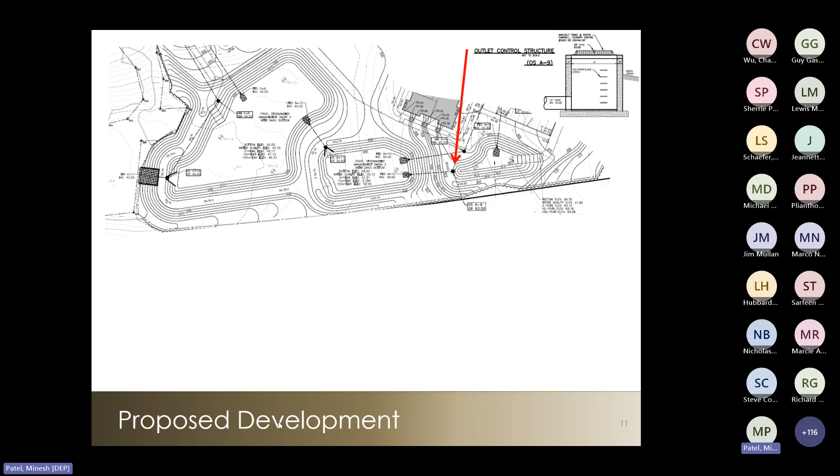Since the grate is at elevation 63, you'll see the water quality design storm infiltrates, and the 2, 10, and 100-year storms overtop the grate, flowing to Basin 2, which has outlet structure B11. And if you look at the detail, you'll see that the lowest orifice in B11 has an invert of 50, which is below the water surface elevation of the water quality design storm contributory to Basin 2.

So Basin 2 wouldn't meet the design criteria for infiltration basins according to our BMP manual. And similarly, the lowest orifice at OCS 10 is below the water surface elevation of the water quality design storm. So in conclusion, Basins 2 and 3 are not going to meet the design criteria for infiltration basins according to our BMP manual, and they're not going to merit the 80% TSS removal rating.

So these contributory drainage areas would most likely be larger than the ones found in Table 5-1. They would be probably more suited for those in Table 5-2, which would require a variance before they can be used for quality and recharge. Waivers are for the enlargement of an existing public roadway or railroad, or the construction or expansion of a public pedestrian access, which this project is not.

The next slide we're going to see is going to revisit the subject of variances here. There are strict standards to be met in order to grant a variance, as you know. More specifically, the municipality has to have a mitigation plan in place that identifies what measures are necessary, potential mitigation projects, and/or criteria to evaluate mitigation projects that can be used to offset the deficit created by granting a variance.

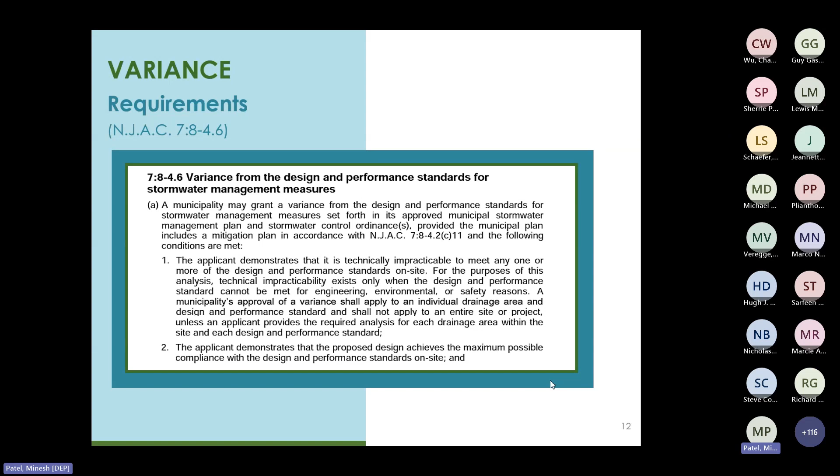So let's conclude the review of this example by answering the 3 green infrastructure questions for the proposed design, even though only one small-scale infiltration basin was actually proposed. They must all be answered with a yes for the project to meet the GI rule requirement.

The BMPs were not located next to the parking areas, so the first answer is no. The BMPs were all located near each other along the southern property line, so the answer here is no. And it didn't look like basins 2 and 3 infiltrated the water quality design storm and were instead discharging downstream during the water quality design storm. So the answer for 3 likely is going to be no.

So to wrap things up, this project does not comply with the requirements to use green infrastructure to meet the design and performance standards for water quality, groundwater recharge, and stormwater runoff quantity control.

So let's talk about alternative designs that would be distributed throughout the site to make the project compliant with our GI requirements. There can be several approaches that could be implemented using the proposed layout to make it more compliant with the green infrastructure requirements. So here are some possible ideas to consider.

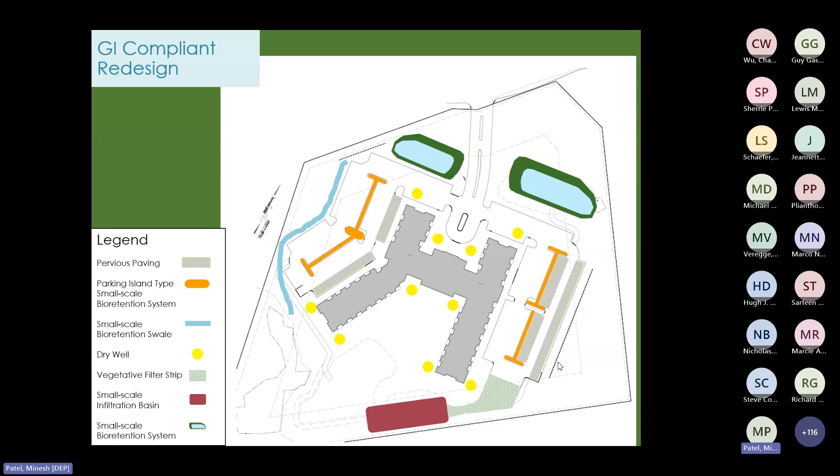So that does it here for example 2. Thanks for your attention. Here's my contact information, and I will hand it back to Chang-Yi if we have anything additional we have to cover.

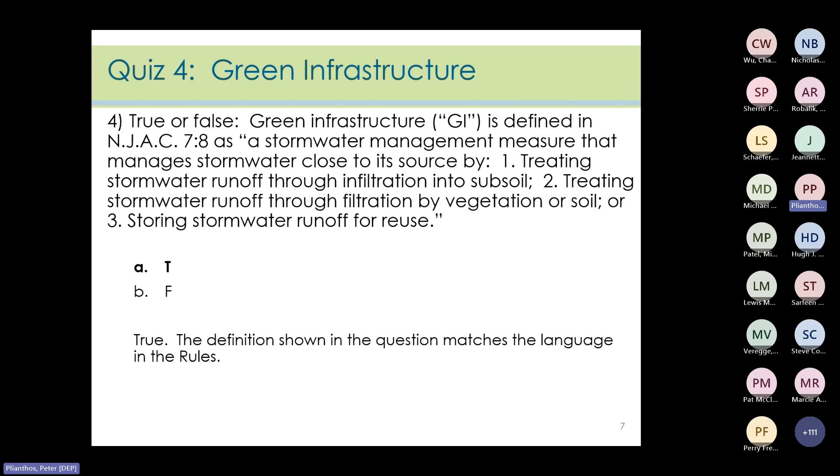Number 5, which questions need to be answered yes when designing a major development to meet the GI requirements? The correct answer is D, all of the above. As found in the GI fact sheet, the stormwater must be managed close to its source, the BMPs must be distributed throughout the site, and the drainage area limitations, as applicable, must be met when designing a major development to meet the GI standards.

Question 6. Which of the following GI BMPs has a contributory drainage area limit that is other than 2.5 acres? Dry wells is the answer. Dry wells have a 1 acre contributory drainage area limit per NJAC 7:8 5.3b. This information was also in the slides from the GI fact sheet presentation.

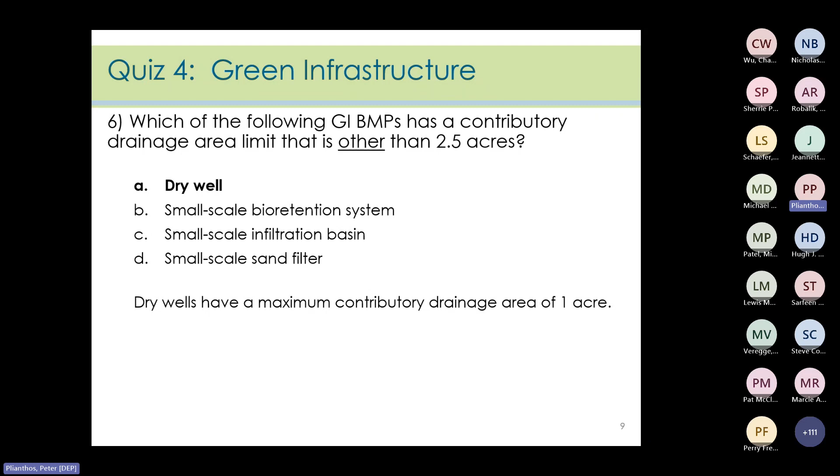Number 7. Unless a variance is granted, which of the following BMPs cannot be used to meet the quantity control requirement? The correct answer is extended detention basins from Chapter 11.2 of the BMP manual. In accordance with NJAC 7:8 5.2, extended detention basins cannot be used unless a variance is granted. The presentation for example 2, specifically slide 12, included the information on what must be in place for a municipality to grant a variance from the GI requirements.

Number 8, yes or no? Can GI BMPs be located near one another for the following scenario? There are 7 dry wells located adjacently on 3 sides of a large building. No more than 1 acre of roof runoff is directed to each individual dry well, and each dry well will function individually for the water quality and recharge storms. The answer to that is yes. This material is covered on slide 13 of the GI fact sheet presentation from earlier today, and you can find more information about this setup on the GI fact sheet itself. The important factor here is making sure the answers to the 3 questions for GI are yes.

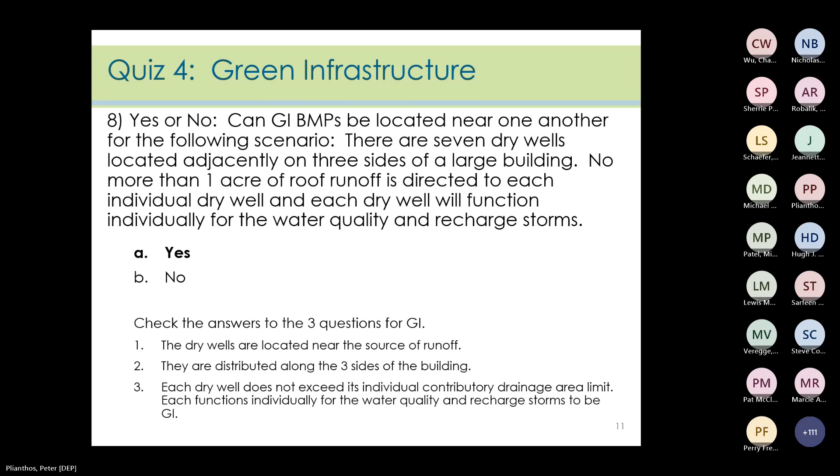Number 9, which of the following is recognized as a co-benefit of using green infrastructure? D, all of the above is the correct answer. As described on pages 1 and 2 of the green infrastructure fact sheet, all 3 of these are environmental, social, and economic co-benefits of using green infrastructure. Additional co-benefits include increased property values and the removal of pollutants from the air through the greater utilization of vegetation.

Number 10, yes or no? Is the interconnection between GI BMPs in the following scenario acceptable? A small-scale bioretention system infiltrates runoff for the water quality and groundwater recharge storm events, meeting the 2.5 acre contributory drainage area limitation. The 2, 10, and 100-year storm events are discharged from the small-scale bioretention system to a large-scale infiltration basin, which is used only for water quantity. The answer is yes. From NJAC 7:8 5.2, the downstream large-scale infiltration basin can only be used to meet the quantity control requirement and is not subject to the contributory drainage area limitations found in 7:8 5.3b. Additionally, the upstream small-scale bioretention system fully infiltrates the water quality design storm and the recharge storm.

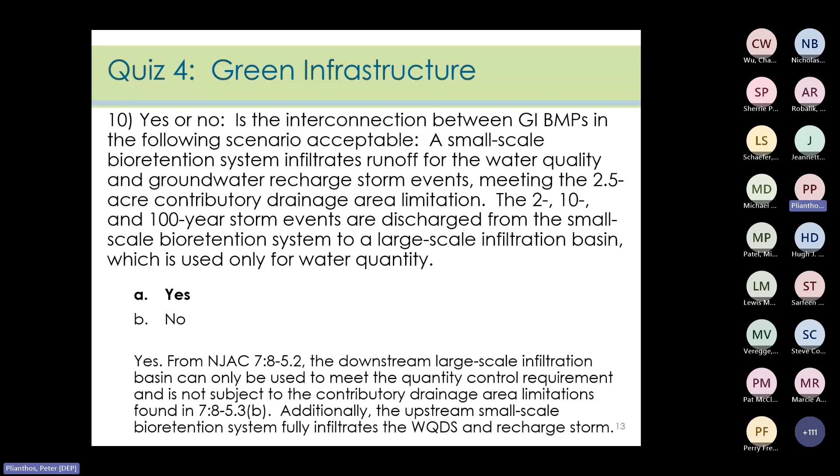Number 11. Which of these can be used to demonstrate compliance with the water quantity design and performance standard? The correct answer is B: design stormwater management measures so that the post-construction peak runoff rates for the current and projected 2, 10, and 100-year storm events are 50, 75, and 80% respectively of the pre-construction peak runoff rates. Only this option fully aligns with one of the water quantity options in the stormwater management rules.

Number 12, true or false? BMPs from Table 5-2 can be used to meet stormwater quality requirements without obtaining a waiver or variance from NJAC 7:8 5.3. That statement is false. BMPs from Table 5-2 can be used for stormwater runoff quantity only. For them to be used for stormwater runoff quality, a waiver or variance from NJAC 7:8 5.3 must be obtained.

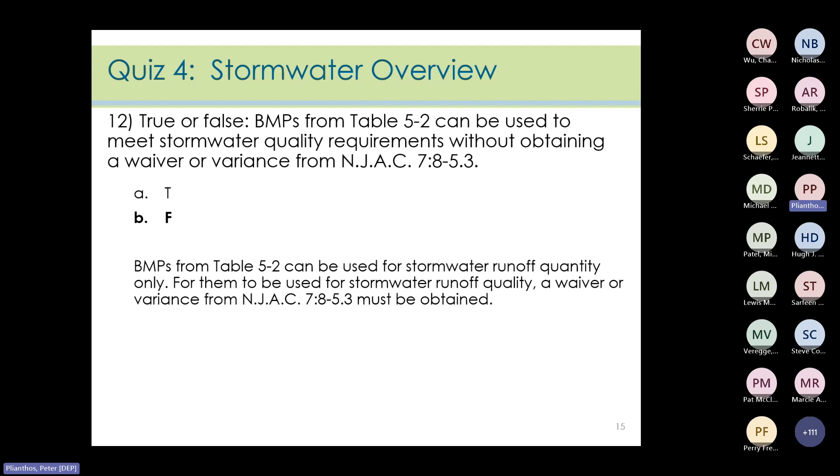Number 13, yes or no? Can the Delmarva dimensionless unit hydrograph be used for the redevelopment of a 2-acre entirely impervious site located within the coastal plain? The answer is no. The Delmarva dimensionless unit hydrograph must be used when modeling watersheds within the coastal plain region of New Jersey, with just a few exceptions. It cannot be used to size a manufactured treatment device, or MTD, as it may underestimate the peak flow rate entering the MTD. Also, for an entirely paved site, the significant surface storage associated with the coastal plain is no longer present, also resulting in underestimated peak flow rates if the Delmarva is used. Additionally, the Delmarva should only be used in areas that have an average watershed slope less than 5%. If any of these situations are proven to be present, the NRCS standard dimensionless unit hydrograph must be used.

A side note on the subject: if the Delmarva is used in the pre-construction condition, it must also be used in the post-construction condition. The same idea goes for the NRCS.

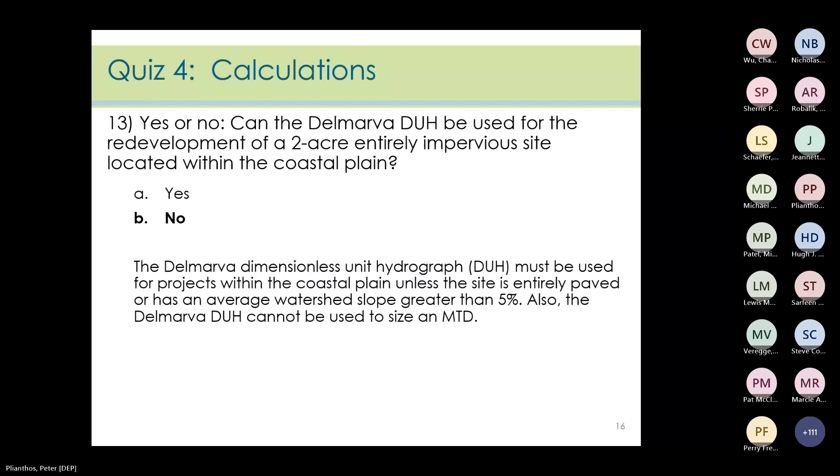Question 14. Soil testing logs prepared in accordance with Chapter 12 are required for which of the following BMPs? The correct answer is all of the above. All of these have a minimum separation from the seasonal high water table, which you can find in their respective BMP manual chapter. Soil testing would therefore be required for all of these to ensure that they meet the required separation.

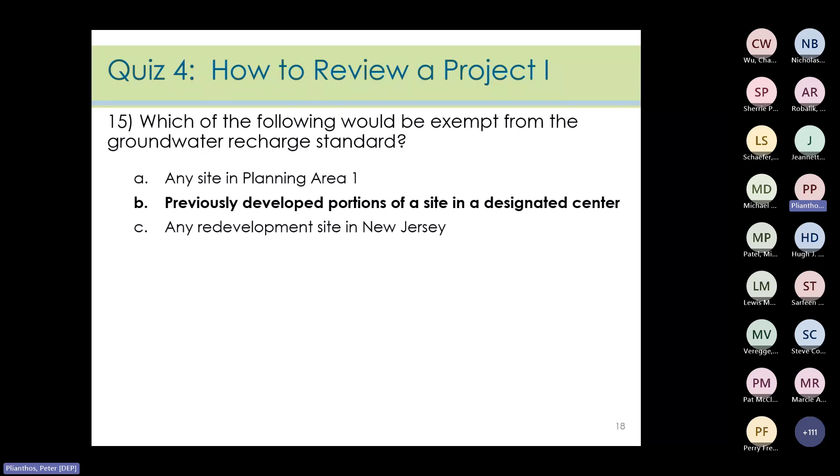Number 15. Which of the following would be exempt from the groundwater recharge standard? The correct answer is B, previously developed portions of a site in a designated center. Just being in Planning Area 1 is not an allowed exemption from the groundwater recharge standard, nor is redevelopment automatically exempt. Only previously developed portions of sites in the designated locations listed on the slide can be exempted.

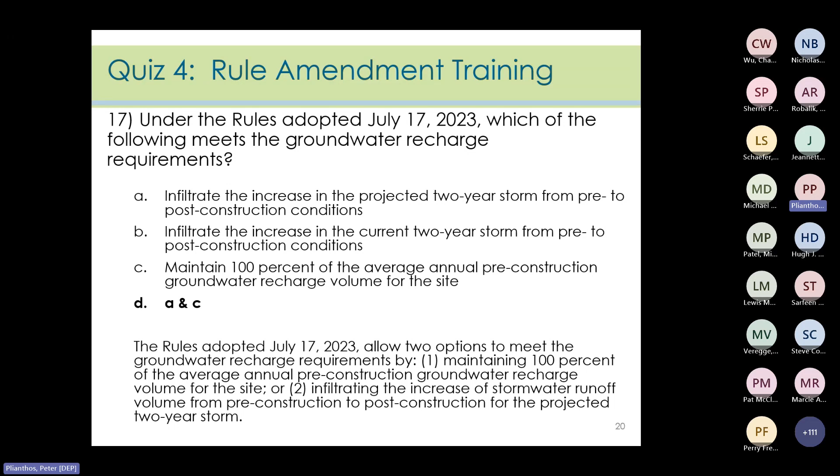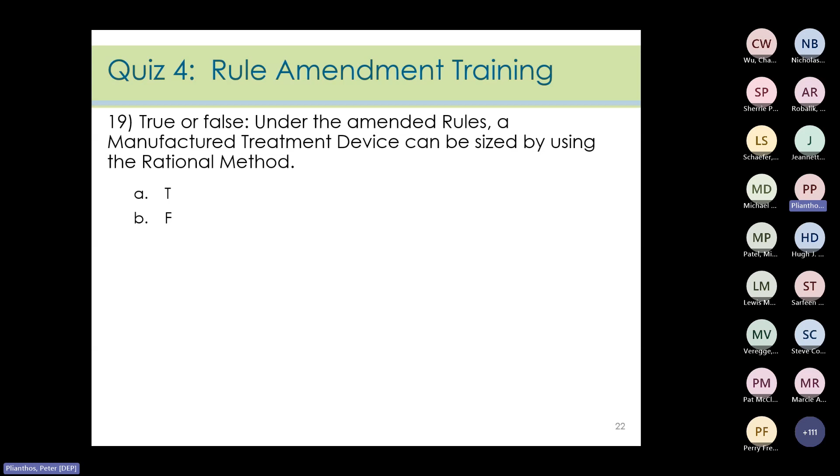Number 19, true or false? Under the amended rules, a manufactured treatment device can be sized using the rational method. That statement is false. Under the amended rules, use of the NRCS methodology for stormwater runoff calculations is now required.

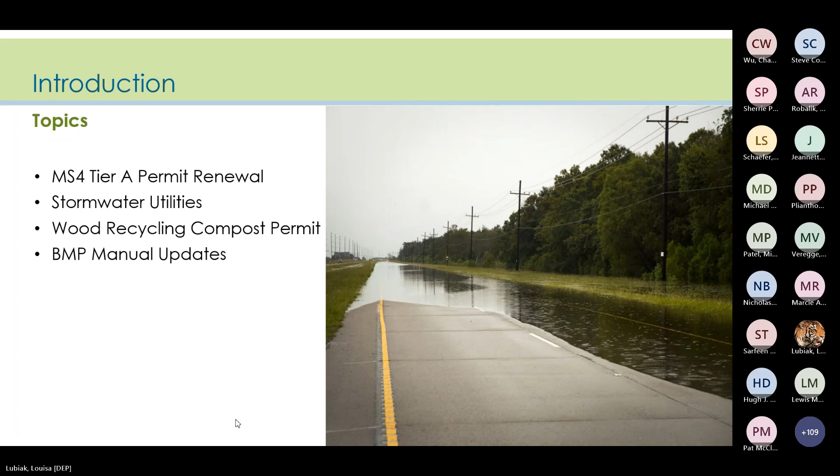The department currently has permittees authorized under 3 types of MS4 permits: Tier A, Public Complex, and Highway Agency.

There are currently 557 municipal permittees authorized under the Tier A permit. There are also a few municipalities that are not regulated under the Tier A permit because they do not have an MS4. These municipalities are not permitted under the Tier A because they are entirely sewered by combined sewers and have a CSO permit, or because their storm sewer system is not publicly owned.

The Tier A permit was last renewed in January of this year. As part of the renewal process, the department addressed EPA's concerns to reevaluate the Tier A and Tier B designations to determine if any of the town's MS4 systems needed to be authorized under the Tier A permit. We found that all Tier B towns required reassignment due to population density increases in urban areas or due to discharges to impaired waters and/or waters with TMDLs.

Other MS4 permits include the Public Complex permit and the Highway Agency permit. We currently regulate 69 public complex facilities, which includes public colleges, universities, hospitals, and/or prisons. The Public Complex Renewal Permit is currently due to expire at the end of this year, so it is being drafted and anticipated to be finalized by January 2024.

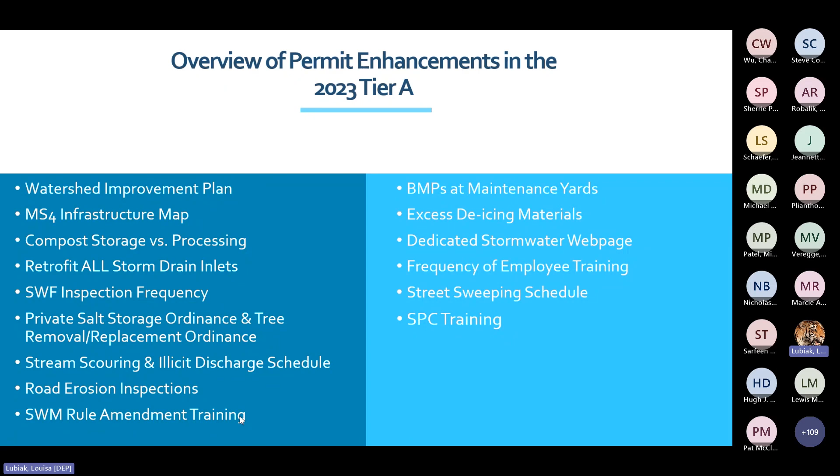Many of these enhancements have been made to address water quality problems, such as impairments and TMDLs that affect waters throughout the state. There is no change to this permit condition.

The 5G3 Master General Permit was recently renewed with a few changes and is available on our website.

There are two minor changes to this condition. First, we clarified the permit language to say that the design engineers cannot approve their own designs. Next, for any amendments to the stormwater management rule, training sessions will be necessary for stormwater design reviewers. This is because attendance at this training, SWMDR, is only required every 5 years, and we don't want to wait that long to train people on the amendments.

Rule amendment training sessions pursuant to the rule adoption in July of this year have been announced by the department on the website and via email to all stormwater program coordinators and people who have attended previous SWMDR courses. This training requirement will also apply to any future rule amendments. Attendance is and will be mandatory and must be completed within 1 year of the adoption of the amendments to NJAC 7:8.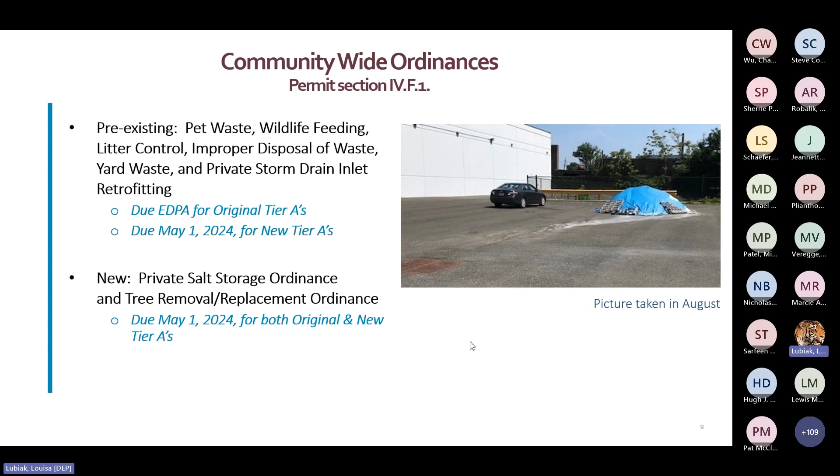We have added 2 new ordinances to the permit and are providing 2 new model ordinances to aid in the adoption process. The first is a private salt storage ordinance requiring owners of private properties and businesses, such as malls and shopping centers, to properly store salt and other solid de-icing materials. The next is a tree removal and replacement ordinance to reduce runoff and promote infiltration. Some towns may already have similar tree ordinances, and if their existing ordinance meets the minimum permit requirements, the town will not need to adopt our model. We have completed evaluating the comments submitted on the 2 drafts and have finalized both model ordinances.

There is no change related to labeling inlets. The change here is that all remaining storm drain inlets that have not yet been retrofitted due to utility work or repaving projects must be retrofitted by December 1, 2027. The entire structure can be replaced with an updated one, or you may attach a bolt-on plate to reduce the size of the vertical opening of the old inlet. In addition, all newly installed inlets must have a catch basin or other BMP to collect solids. We also included an exemption for catch basins on bridges.

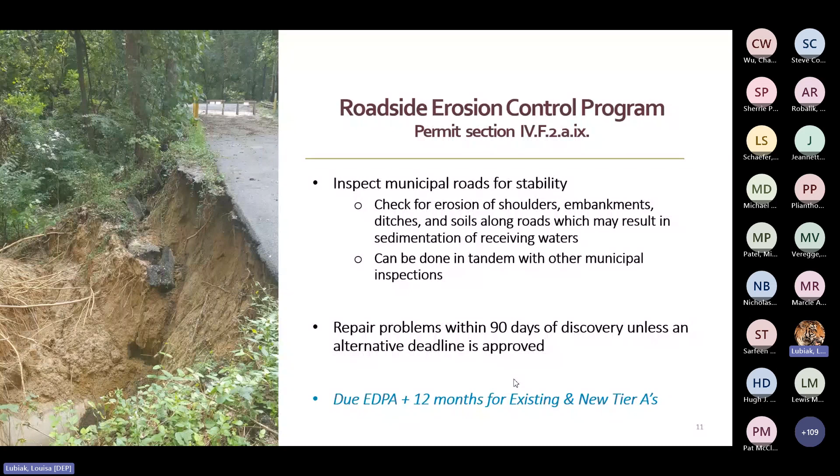Erosion checks can be done while performing other stormwater inspections, so you don't need to schedule additional trips. If problems are identified, we allow 3 months to address them, unless another time frame is authorized by the department.

We want to clarify that inlet inspections and catch basin inspections are different activities with different schedules. The condition of storm drain inlets can be observed with a simple drive-by inspection and a quick sweep or shovel if the grate is clogged. For this reason, we require that all storm drain inlets be inspected every year. Catch basins, on the other hand, require additional work. The inspector must get out of the truck to inspect the inside of the catch basin to determine cleaning needs, and must inspect a minimum of 20% of the total every year on rotation, so that all catch basins are inspected by the end of the permit cycle.

This is a clarification to highlight that the permittee is required to properly inspect, clean, operate, and maintain all stormwater management measures. This is a catch-all condition, referring to all remaining stormwater facilities not mentioned specifically in another permit condition, such as stormwater management basins and MTDs. This program should define what conditions warrant cleaning, proper operation, and maintenance of any remaining stormwater infrastructure, and establish an inspection schedule tailored to your municipality's characteristics and resources. If there is no approved maintenance plan, towns can prepare a retroactive maintenance plan for certain infrastructure, or inspect at least 4 times annually and after each rainfall of 1 inch or more. Keep in mind that inspection logs must be maintained.

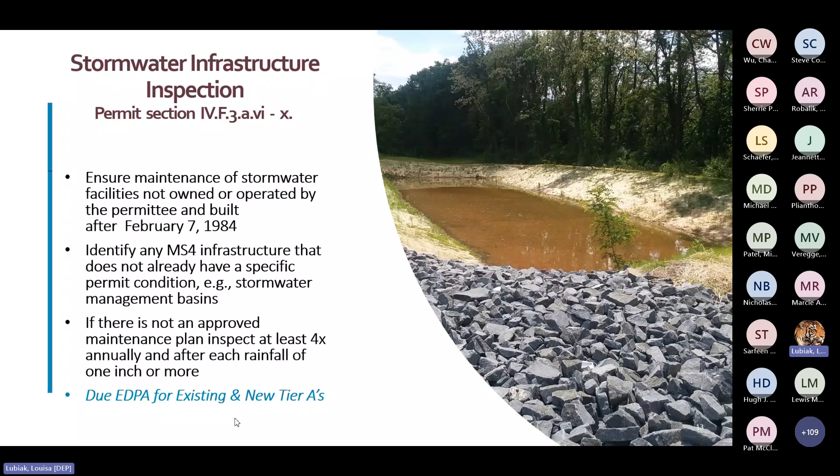Here is a list of the new or modified BMPs for maintenance yards and other ancillary operations. Note that requirements previously included in Attachment E are now in the body of the permit, not in an attachment. All the BMPs listed here have been modified from the 2018 permit, with the addition of a few new BMPs. For example, the Tier A permit will no longer authorize stormwater discharges from wood chipping or leaf composting activities, as these will be covered under the department's new wood waste recycling and leaf composting general permit.

Some of the other changes include: scrap tires must be stored in a covered container or enclosure. Inoperable vehicles or equipment can be stored on site for up to 6 months and must be inspected monthly. All containers and dumpsters stored outdoors must be covered at all times to prevent exposure to stormwater. If outside, bulk liquid materials must be stored in secondary containment, such as spill containment dikes. Aggregate material and construction debris can be stored on site for up to 6 months, but no processing activities are authorized under this permit. Cold patch asphalt shall be stored in a permanent structure or covered with a waterproof material on an impervious surface.

These are the MS4 permit training requirements. The SPC training requirement is required for all SPCs so that they know their responsibilities for implementing their stormwater program. This is required once per permit cycle.

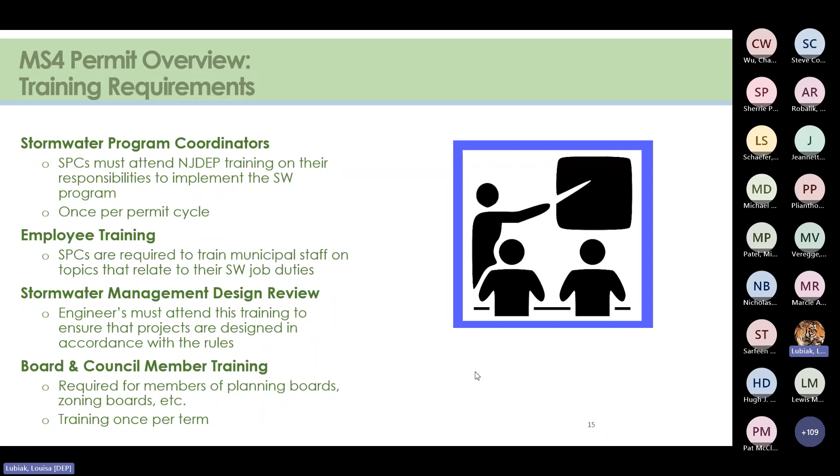The municipal board and governing body member training requirement is training for board and council members. This training is a higher level training intended to familiarize those members with the permit and permit requirements. This is required once per term.

Original Tier A permittees should have already mapped their stormwater outfall pipes and will now need to add the rest of their infrastructure. Mapping is an entirely new condition for the new Tier A towns. This means mapping everything that collects or conveys stormwater, including outfalls, groundwater discharge points, interconnections, storm drain inlets, manholes, stormwater conveyance systems, pump stations, and any other stormwater facilities you have.

You are also required to map the property boundaries of maintenance yards and ancillary operations. Permittees must submit the MS4 infrastructure map electronically to the department by January 1, 2026.

Electronically does not mean a PDF sent via email. Rather, it means submitting georeferenced shapefiles, geodatabases, or AutoCAD files with all other non-applicable data stripped out. The department has developed a free mapping tool for towns to use, and we can provide

ArcGIS online licenses for free. Additionally, the tool has been updated to accommodate for any additional stormwater facilities and features that are required to be mapped. Lisa covered this information back on the first day of training.

If the DEP mapping tool is used, data submittal is automatic. Otherwise, the files will need to be uploaded via the online stormwater document submittal service. The MS4 infrastructure map shall also be posted on the permittee's dedicated stormwater webpage when it is complete.

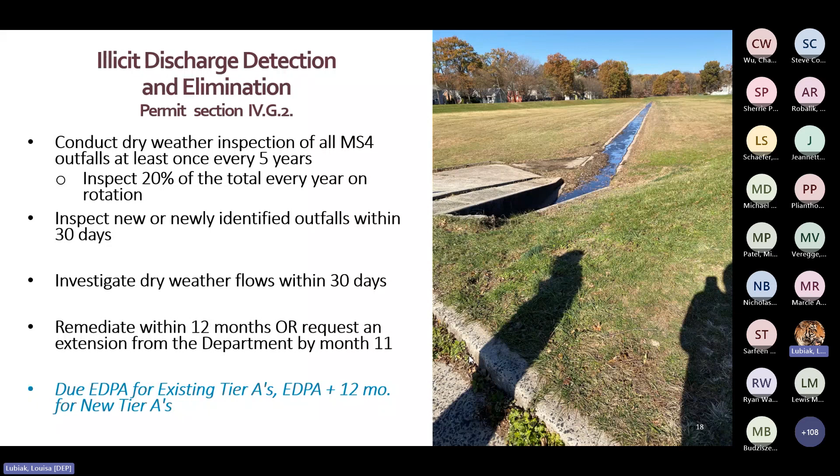There are many water quality impairments and resulting TMDLs that affect waters across the state. Some of these impairments affect fish and aquatic biota, drinking water intakes that supply the water we drink, and even in rivers and coastal waters, where many of us swim every summer. Harmful algal blooms in many lakes due to water quality impairments are also occurring more frequently in the summer months.

Some of these waters have no other discharges into them other than the local MS4s. Therefore, the department requires that each Tier A permittee develop a watershed improvement plan to determine what improvements can be made to reduce their contribution of pollutants that are causing impairments to the state's waters.

This watershed improvement plan will be split into 3 phases with separate due dates. The watershed improvement plan shall be updated when necessary based on the biennial review of revisions to the impairments of the permittee's water bodies based on the department's integrated report and newly adopted TMDLs.

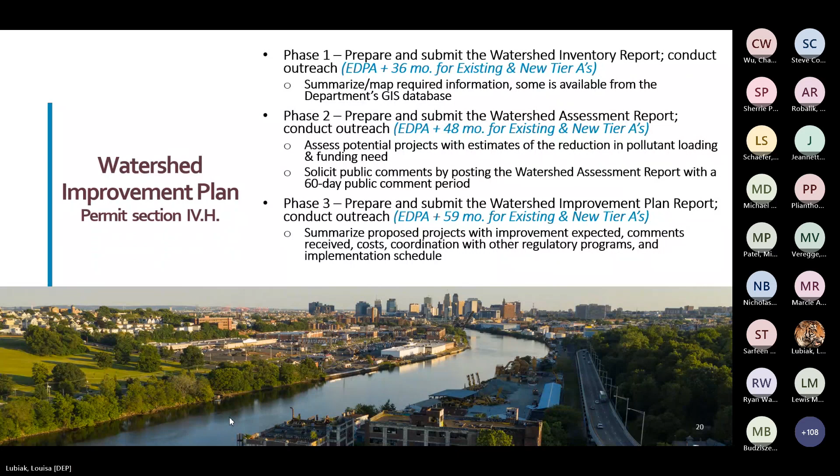The department has offered a Notice of Funding Availability, an NOFA, to assist New Jersey municipalities in upgrading their MS4 stormwater programs to comply with the requirements of the 2023 Tier A MS4 permit renewal. The department is making $75,000 in aid available to former Tier B permittees to meet the compliance standards of the newly issued Tier A renewal permit.

Eligible applicants must complete and submit the application form to receive the initial $25,000 disbursement of grant funds. Applicants must then submit an acceptable stormwater pollution prevention plan, SP3, to receive the final $50,000 disbursement of grant funds.

The department is making $25,000 in aid available to original Tier A permittees for the development, update, and maintenance of an MS4 infrastructure map delineating the location of stormwater features owned or operated by the permittee.

Eligible applicants must complete and submit the application form to receive the initial $15,000 disbursement of grant funds. Applicants must then submit an acceptable MS4 infrastructure map to receive the final $10,000 disbursement of grant funds.

To apply, just submit the appropriate application to the department. The application can be found on our website at the address on the slide. The application deadline is December 31, 2023.

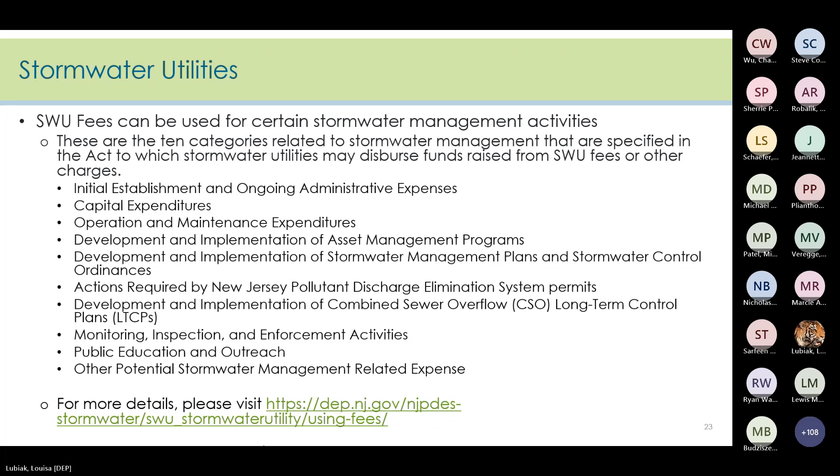I want to start off by describing the background and reasoning behind the creation of this new permit. First and foremost, importantly, wood waste recycling and leaf composting are federally regulated industrial activities and will need a NJPDES stormwater permit, whether it be this new general permit or another stormwater permit.

While federal regulations require facilities that process wood waste or compost yard trimmings to get authorization under a NJPDES permit, those facilities are not stuck with the wood recycling and composting permit as their only option. Facilities may obtain authorization to discharge under an individual permit, an RF, a 5G2 stormwater general permit, or obtain the WRC permit depending on the level of exposure to stormwater.

If a facility does not wish to obtain a WRC permit, but the industrial activities occurred on site and the source materials stored on site are exposed to stormwater, then an individual stormwater permit, RF, is required. RF permits typically have more stringent requirements, including additional BMPs and monitoring parameters.

This permit was created to address current gaps in permit coverage from the wood recycler's general permit, individual permits, and MS4 Tier A permit. These are the permits that regulate stormwater discharges from some wood waste recycling or composting activities, but they are not all encompassing.

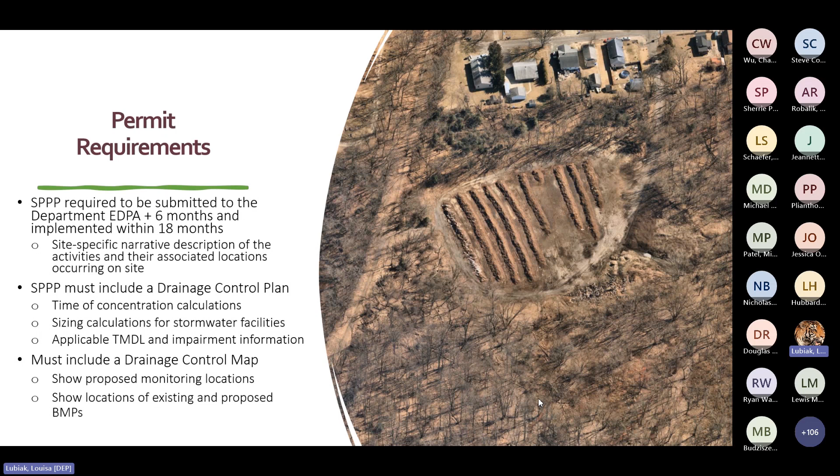The SP3 shall be retained at the facility for use by the permittee and for inspection by the department. Additionally, the SP3 shall be made available to the public upon request. We also want to note that this list is not all inclusive of the SP3 requirements, but these are some of the main components.

Here are some additional permit requirements.

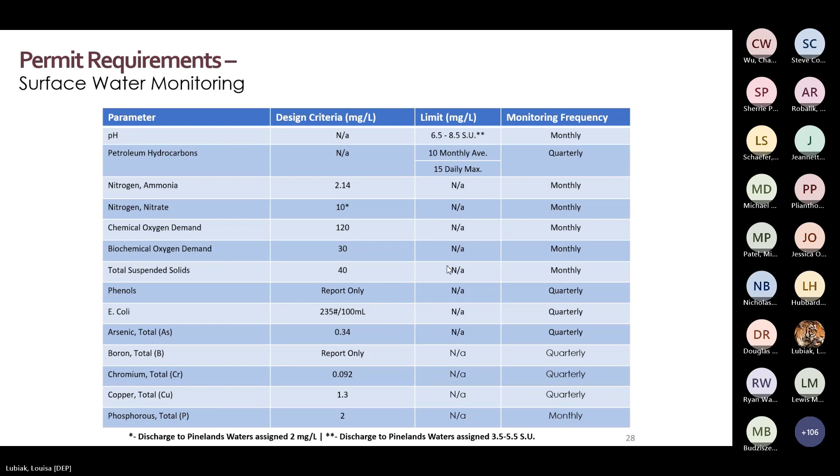Storm event parameters should be recorded every time a stormwater sample is taken, whether monthly or quarterly sample. Samples should be taken within 30 minutes from when stormwater begins to discharge from each monitoring location.

Listed here on the slide are the required minimum site-wide BMPs that must be implemented. Permittees can choose to implement additional BMPs to mitigate pollutant runoff and control drainage on site.

First, site inspections are to be conducted quarterly during dry periods to identify and address any problems. Quarterly inspections are also required to be conducted during storm events to ensure that BMPs are functioning as intended. Permittees must also conduct annual inspections of the facility to assess all areas contributing to stormwater discharges, which may replace one of the required quarterly inspections.

Moving along, the permittee must establish BMPs for site stabilization and dust control to prevent the transport of particulates and sediment, including entrance and exit stabilization and stabilization of areas that have a high potential for soil erosion, stream bank stabilization, and stream scouring prevention.

The permittee shall design, implement, and maintain BMPs to prevent erosion and sedimentation caused by stormwater at the outfalls, and inspect for stream scouring. The permittee shall also restore any eroded areas in the vicinity of their outfalls within 6 months of identification of stream scouring.

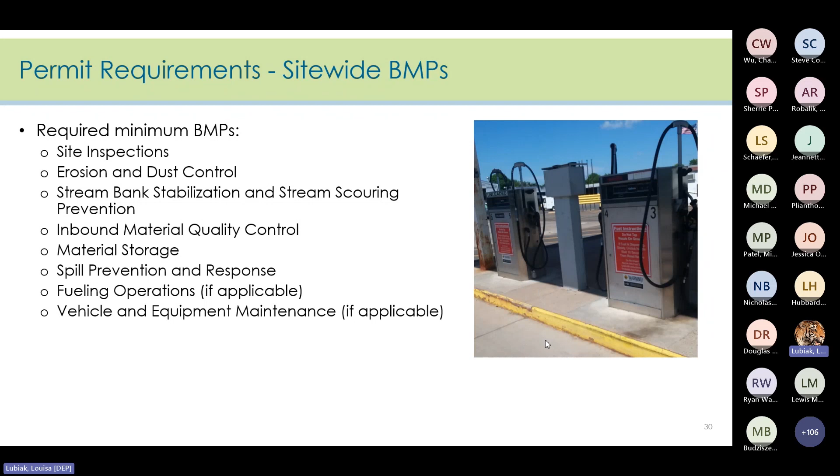Whenever possible, conduct these activities indoors. For outdoor projects, drip pans must be used, and for those that will last more than one day, portable tents or covers should be placed over the equipment when not being worked on.